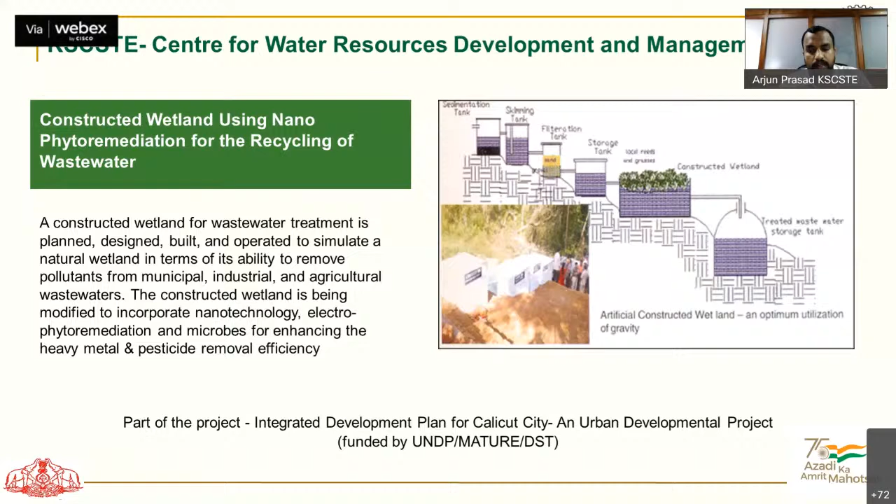Integrated Rural Technology Center is a granting institution of KSCSTE, involved in developing several innovative technologies, including crop residue biomass rapid composting, which is beneficial for farmers. They have established over 250 crop residue composting units in the district of Palakkad.

They have also developed a recirculatory aquaculture system with a moving bed biological reactor aquaponic system, a technology where water is recycled and reused after mechanical and biological filtration, used for high density culture of various species of fish utilizing minimum land area and water.

Another one is IRTC's microbial inoculum for solid waste management. It's a combination of safe bacteria, actinomycetes, and fungi with vibrant enzymatic activities, which has applications in the leather industry and elephant waste composting.

Now I would like to inform about some new initiatives of the Government of Kerala in the area of promising technologies, especially with future impact. In the present budget, many new projects have been proposed, which focus on steps to boost the knowledge economy and linking skill with manufacturing.

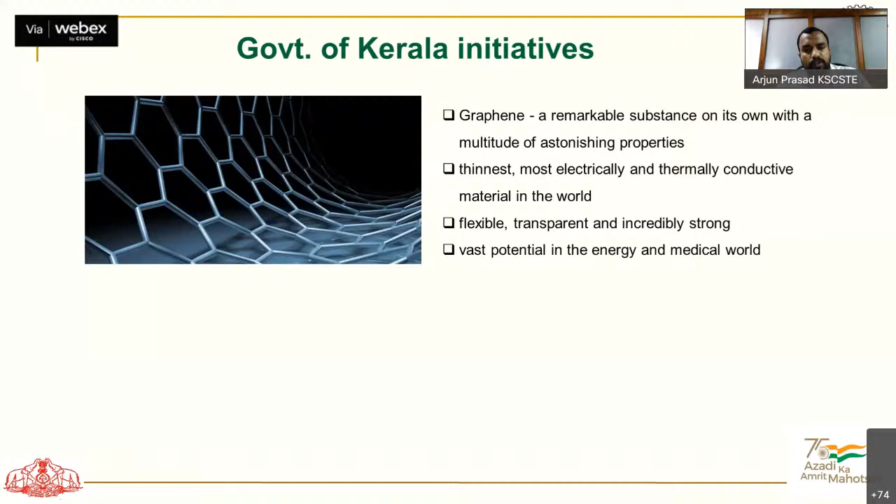Graphene is a remarkable substance on its own with a multitude of astonishing properties. It is the thinnest and most electrically and thermally conductive material in the world. Being very flexible, transparent, and incredibly strong, it has huge potential in the energy and medical fields.

Because of this huge potential, the Government of Kerala is in the process of establishing India's first Graphene Innovation Center, which is a joint venture of the Digital University of Kerala, the Center for Materials for Electronics Technology, Thrissur, and Tata Steel Limited. As we have seen, the Government of Kerala has numerous initiatives and programs to promote R&D and human resource development in the area of future technologies.

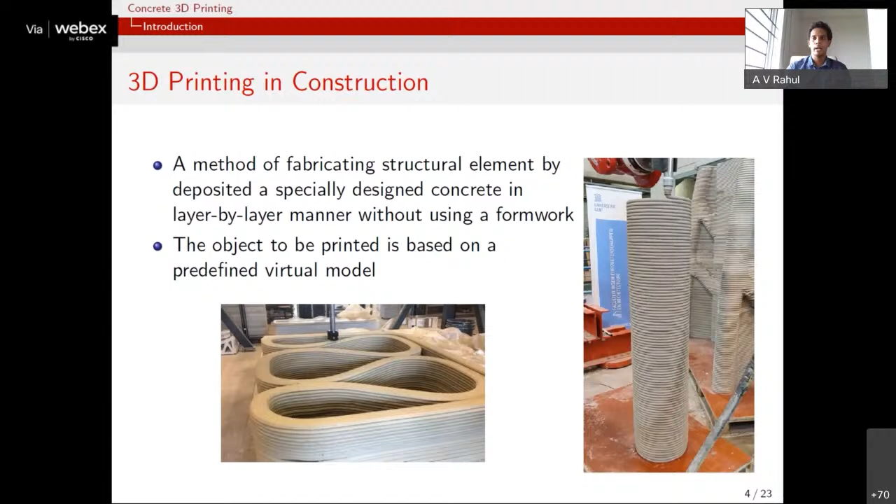So making complex elements, and also the elimination of resources and rapid construction, becomes the key attraction with concrete 3D printing. Now, right from the point where this technology started being adopted, many countries around the world showed interest in this technology.

The first proposition of this idea happened around 1996, 1997. But a real push for this technology started around 2012, where it was demonstrated at a laboratory scale that concrete mixtures can in fact be designed for this kind of technology, for layer-wise deposition.

Once this was demonstrated at a laboratory scale, a lot of people around the globe got involved - a lot of groups in Europe, a lot of groups in the US, and even in Asia, China, Singapore, India has also been involved in a few projects where they're trying to implement this technology. So a lot of countries around the world have shown keen interest, and it's not just the research groups.

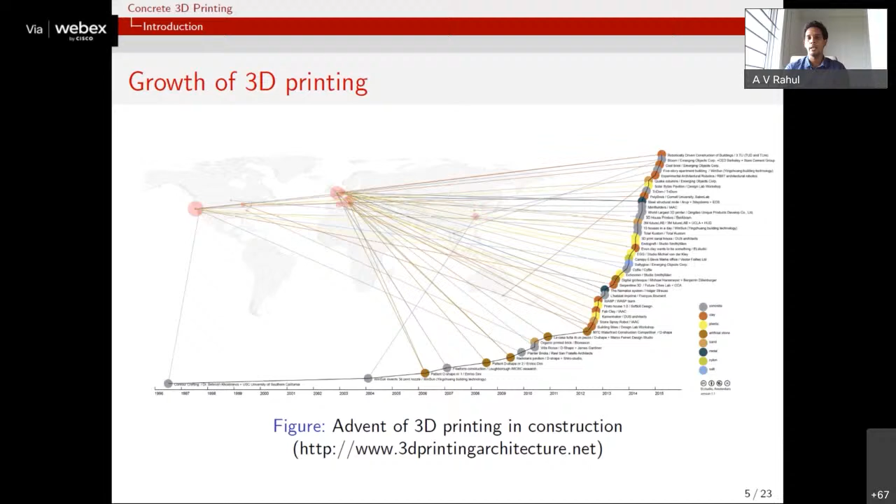Even if you look from the industry side, in Europe for example, there are many startup companies focusing on this technology, trying to provide services specific to concrete 3D printing, specializing in this area now. So both industry and academia have shown keen interest in taking up this technology, from the time it was first introduced. So some major projects have happened around the world which have utilized this technology.

On the top left, you see a barrack building that's made by the US Army. Now, the interest of the US Army is another aspect concerning 3D printing, where you can do construction in inaccessible areas. Their idea is they transport the 3D printer there, and then they can set up a barrack building very quickly in areas where they can't really transport labor and other resources to the construction site. So construction in inaccessible areas is one of the focuses which the US Army is particularly taking this up for. Even the Indian Army has some projects where they're trying to make barrack buildings through concrete 3D printing technology.

The second one that you see on the right side is called the Milestone Project, which involves construction of 5 residential houses. The idea of constructing these houses is to bring out the shape freedom that you get with 3D printing. You can see these beautiful curves designed by the architects who made this building. That's possible again because of the fact that you don't need formwork, and these complex shapes can be realized through niche technology like 3D printing.

The third one that you see is set up in Italy, the project that was showcased in the Venice Biennale. It's a multi-leg pedestrian bridge actually, which was 3D printed. Different elements were 3D printed, and then they were assembled together. The design was such that altogether the members act in pure compression, so then you eliminate the need to have reinforcement in the structure.

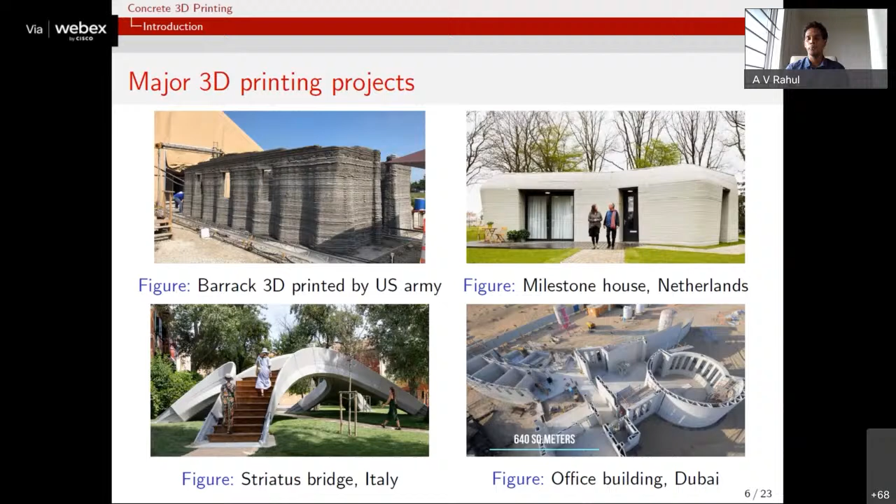Again, these arches and these unique shapes can be quite easily fabricated by concrete 3D printing technology. To do this through conventional methods, to make thin elements and curved elements, would have been quite challenging. Then the one you see at the bottom is a project that's happened in Dubai, an office building which is right now one of the largest buildings that has been 3D printed. It's about 640 square meters. This is an office building that's made in Dubai.

So with printing, we'll talk about more technical aspects related to the mixture proportion and from a civil engineering perspective. One key aspect is how do you design the mixture for concrete 3D printing.

Now, if it's even any type of 3D printing that you talk about, not just concrete, even polymer 3D printing, what you need to really look at is a transition from a liquid-like to a solid-like behavior. So initially, to pump the concrete to the point where it has to be deposited, you make a concrete and put it in a pump, then it has to be deposited through a nozzle to the print head. So till that point, you want the concrete to remain a more liquid-like material. But once it's deposited out from the nozzle, the concrete should undergo a transition to a solid-like behavior.

In polymer printing, they do this transition based on temperature. Once the polymer comes out, it's quickly cooled. Inside the pump and the regions where it's being transported, it's heated above its melting point, so it's like a liquid. Once it's exited from the nozzle, there's a sudden transition in temperature which causes it to transform quickly to a solid. In concrete, we work in a different way, which I'll talk about in the coming slides.

So two aspects that you need: one, the ability of concrete to be pumped up to the nozzle, which we call extrudability in 3D printing terminology. And once it's deposited from the nozzle, it has to be able to retain its shape, or have a solid-like behavior, which we call buildability. These are two essential requirements that you need to characterize to design mixtures for concrete 3D printing.

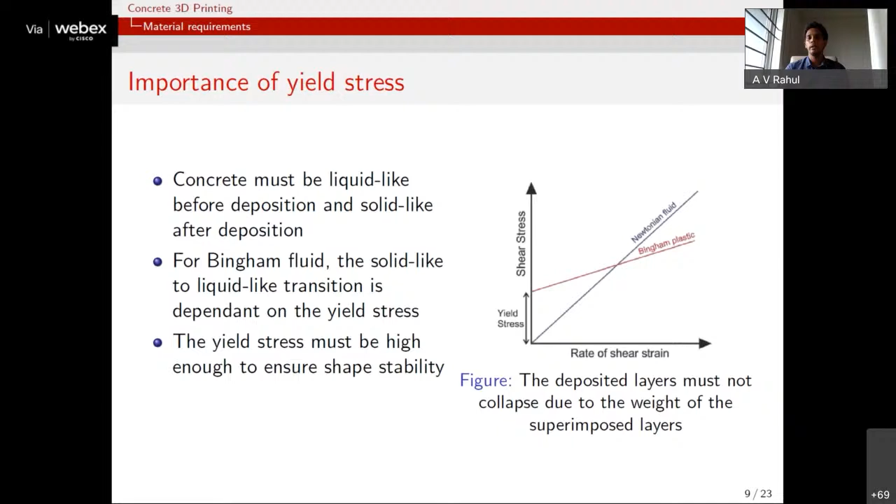This high yield stress ensures that even once the material is pushed out from the nozzle, once there's less stress on the material, flow is prevented and it's able to retain its shape. But during pumping, we use a specially designed pump to go above its yield stress and initiate flow in the fluid. Once it's deposited out from the nozzle, the high yield stress ensures the concrete can retain its shape.

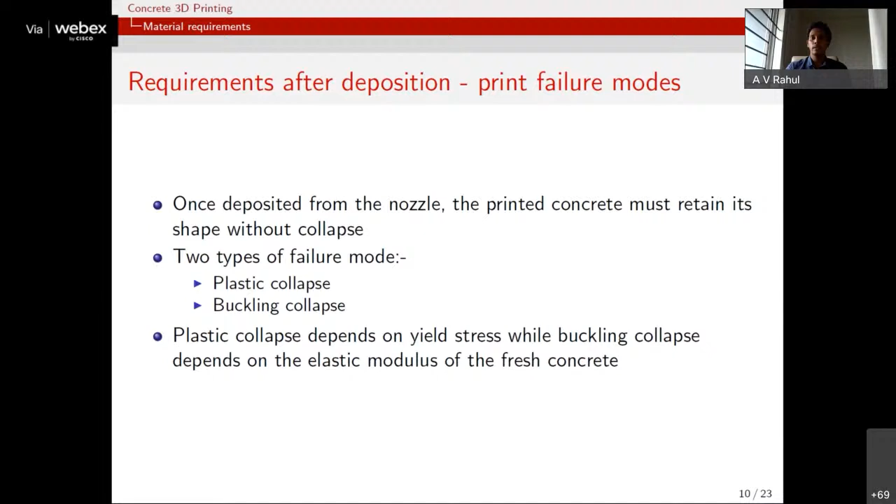The bottom layer starts to flow, and there's plastic collapse occurring in the material. Buckling type of collapse occurs in the case of thin elements. If you have very thin elements, they can undergo lateral deformations due to buckling, and then the element can undergo a buckling failure. Now, if you look at the buckling equations derived for hardened concrete, the same would apply here.

There, the material parameter that influences resistance to buckling is the elastic modulus. So the material should have a sufficiently high elastic modulus once it's deposited to prevent buckling type failure, especially if you're designing or looking at very thin elements.

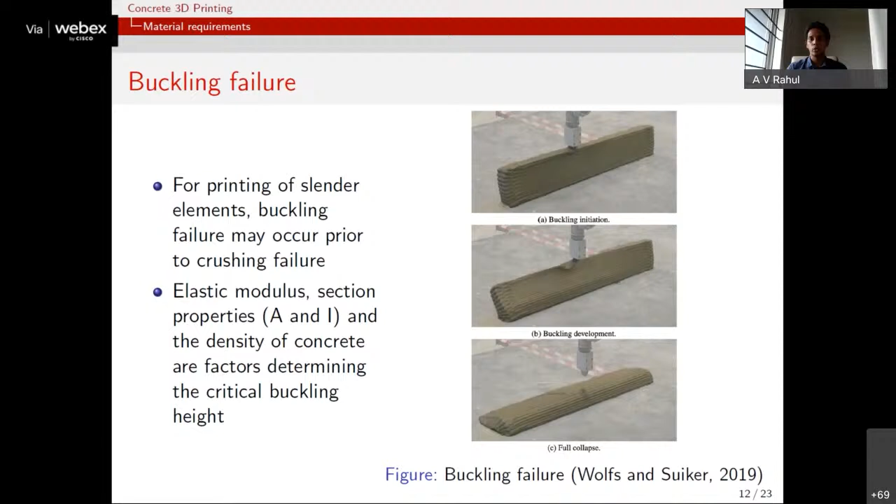Buckling failure will also depend on the section properties or the moment of inertia. For example, a printed element with high moment of inertia provides higher resistance to buckling failure. Also, the cross-sectional area and sectional properties will influence it, and also the density of concrete, which will also influence resistance to buckling failure.

Having understood that elastic modulus and compressive strength both influence plastic and elastic type failure, plastic and buckling type failure in fresh concrete, how do you characterize these properties? In hardened concrete there are standardized methods to do this, but how do you characterize this for fresh concrete? This is an experiment that shows how to do this.

The reason is that there's a high yield stress for this early age concrete, for 3D printable concrete, it's more stiff than conventional concrete. Even when you demold it, it can still retain its shape. Then we do this test with a very sensitive load cell, a very low load cell used to carry out this test. And we capture deformation using a video extensometer system.

Initially you see an elastic behavior and then a plastic type deformation after that. So it's mostly an elastoplastic material early on, but as you proceed to higher ages, as you go to 420 minutes for example, you see more of a strain softening type behavior, which is most closely associated with that of hardened concrete.

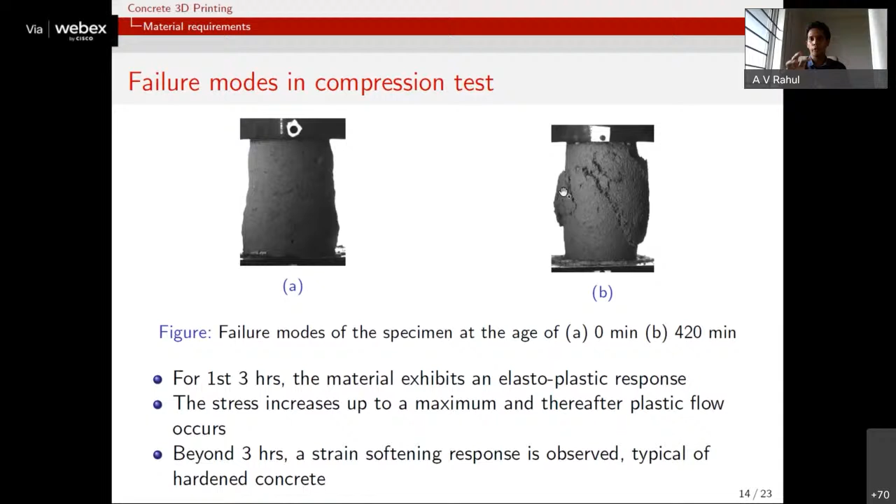So both of these parameters can then be utilized in models to look at whether the print element you're going to make is actually going to fail by plastic collapse, or at what height it's going to fail by plastic collapse, or what height it's going to undergo a buckling collapse. These calculations can be run to ensure that you don't undergo a print failure when you actually carry out the printing process.

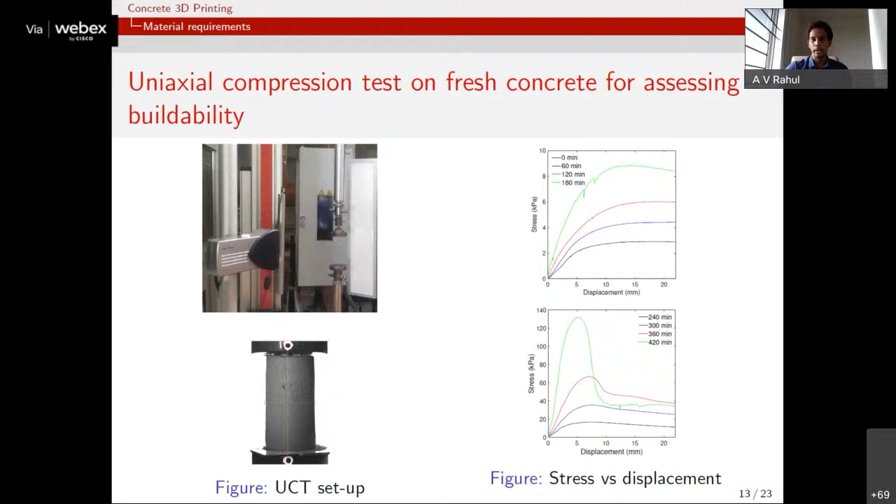Just to give you some brief info about the mixture design. There are no standardized codes or procedures, but you can definitely look at approaches like particle packing to design 3D printable mixtures. In 3D printable concretes, when you choose certain ingredients to include in the mix design, you always have to think about how it will influence the flow behavior or rheology of the system.

For example, if you add additives like microsilica and nano clay, they're likely to decrease your setting time. So you will see a much more rapid evolution of compressive strength and elastic modulus. When your mixes incorporate nanoclay or microsilica, you can carry out printing much faster, because the evolution of the material parameters occurs much faster.

Also, during pumping, you can sometimes encounter issues like phase separation, which you can avoid by using admixtures like methyl cellulose. Robustness is another key aspect you need to consider in mix design.

One problem with 3D printable concrete is that the range over which it actually works is very narrow, especially if you have a batch change in one of the materials. For example, if you're using a particular type of fly ash and the batch changes, you might see a change in the workability of the concrete. That workability change may be just sufficient to cause the mixture not to print properly. So that robustness range you have with these kinds of mixes is very narrow.

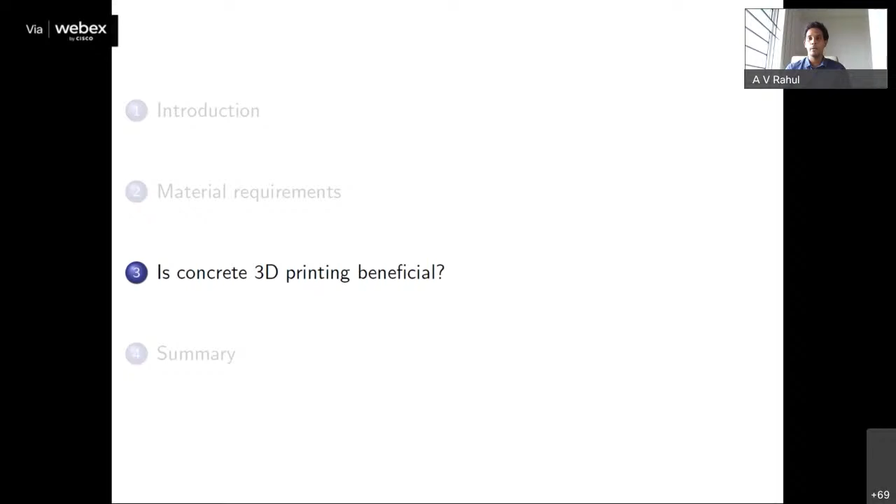Now, to address the question of where you use this technology: what type of structures can you actually make with 3D printing technology? We looked at some of this earlier, where we saw major projects happening around the world. But to generalize, one aspect where you have to look at 3D printing is when you particularly need to do a complex structure. Now, why do you need a complex structure? What advantage do you get from it?

...the conventional construction becomes significantly more expensive, because you have to have formwork for this type of structure, and the formwork cost significantly adds to the total construction cost. But with digital fabrication or 3D printed structures, you don't see that significant increase even as complexity increases. So there's a break-even point, above which conventional concrete is significantly more expensive than concrete made through digital fabrication.

Right now the cost is quite high, but there's a lot of research happening around the world, including in India, where we're trying to bring down this cost by looking at less costly and more viable additives in designing 3D printable concrete. Through further research, this break-even point can be shifted further downward, so that 3D printing becomes more economical even in relatively less complex structures.

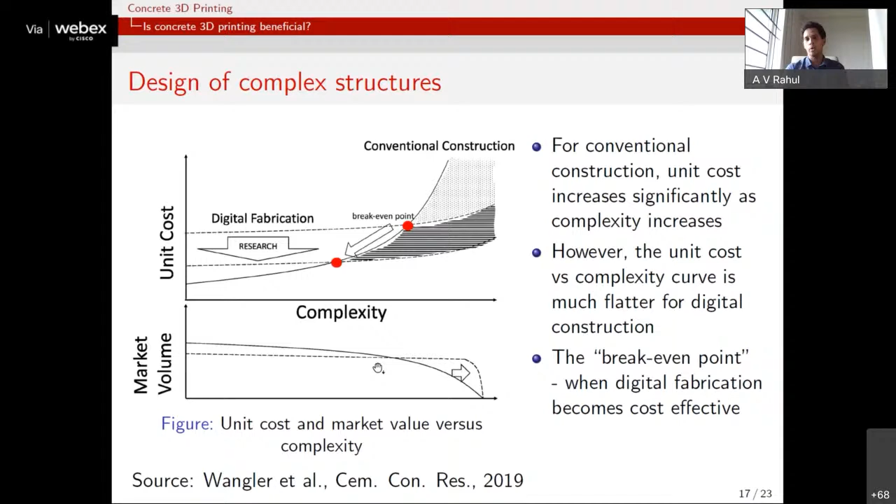So another aspect we need to talk about is why do we need to do complex structures. One aspect with complex structures is that you can actually do shape optimization, and through shape optimization, an overall reduction in material volume can be achieved to meet the same structural performance.

But to really make this complex type of structure is very difficult in real life scenarios because of the formwork involved. With 3D printing, this can be done quite easily, and by introducing that complexity, significant material volume reduction can be achieved. That then brings in the sustainability element in 3D printing.

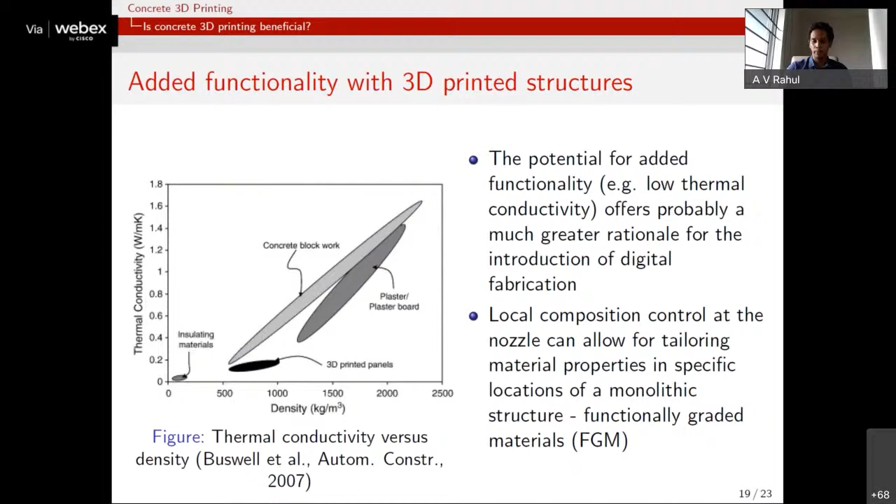Before we wind up this presentation, I'll also give a few aspects regarding a project I worked on. This project is called the 3D2B Green project, carried out at Ghent University in Belgium.

This project is to construct breakwater units using 3D printing technology, in collaboration with some industries, one of the major construction companies in Belgium, and two other companies, ResourceFull and Witteveen+Bos, who are also involved. The aim of this project was to use 3D printing technology for breakwater units and deploy them in Belgium as well as Dubai ports.

Utilizing this technology can bring quite a lot of economic benefits, such as reduced formwork costs, because these complex elements have to be cast in specially made formworks. Given that you need several numbers of these breakwater units, having so many formworks, or waiting for one form to release its concrete before casting the next, introduces significant delay in construction, leading to an overall cost increase. If you can do 3D printing, an in-situ 3D printing robot can be brought to the construction site and print very close to where it has to be deployed.

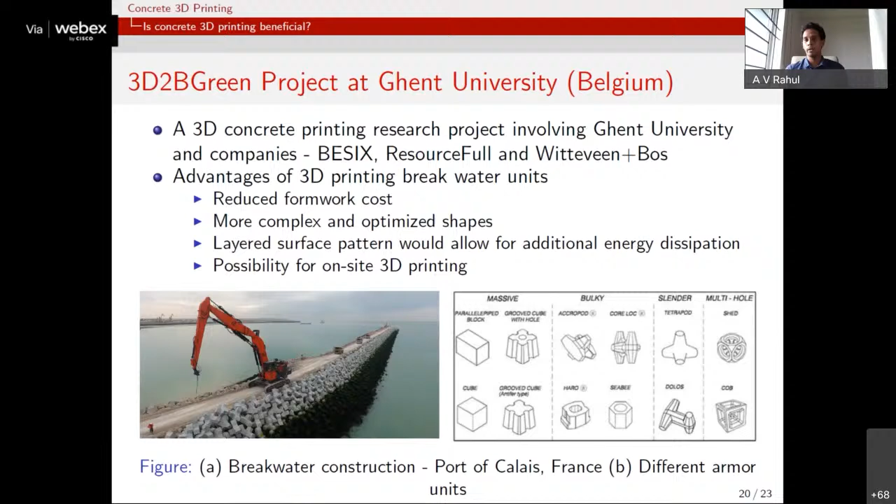Preliminary studies we did at the lab also indicated that the layered structure 3D printing has may provide additional energy dissipation, therefore providing better hydraulic performance when compared to mold cast with 3D printing, and also the possibility for on-site 3D printing, bringing down the transportation cost.

One more aspect I'd like to talk about is a set-on-demand type approach. This is a patented approach developed at the same university. Here we try to introduce an accelerator at the nozzle to increase the buildability of concrete.

In 3D printing, there are several conflicting requirements. One is between extrusion and buildability. For good extrusion, for the concrete to be easily pumped up to the nozzle, it has to be as flowable as possible. But once it has exited the nozzle, it should have very low workability. It should stiffen quickly so you can build more layers on top. So the material requirements before and after extrusion conflict with each other.

Because of this, we are often restricted: if you make it very stiff, you will end up with pumping issues. If you make it too flowable, you will end up with issues on buildability. So most of the time in 3D printing, you are restricted by the height you can reach.

On the right hand side, we worked on a technique called set-on-demand, where an accelerator is introduced just at the nozzle, which significantly alters the stiffening rate of the concrete. The introduction of this accelerator causes it to undergo a flash set, and this allows us to make much larger structures.

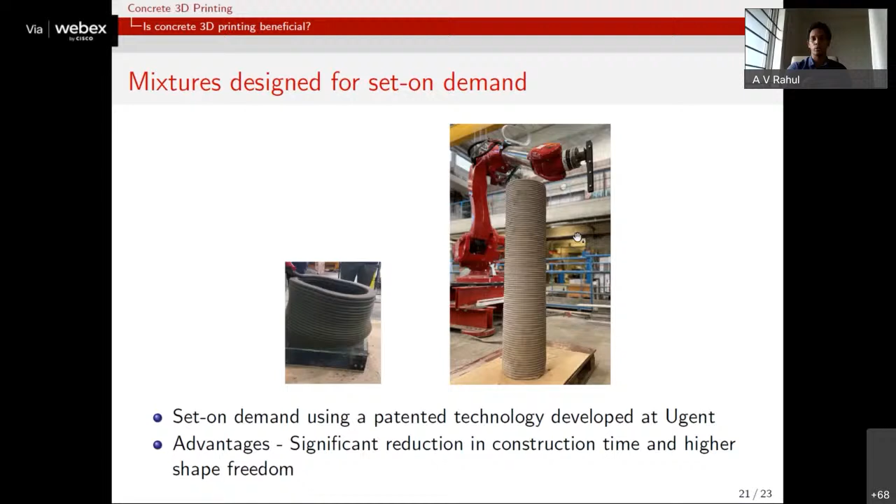This column is about 1.5 meters and shows no signs of failure until now. It was made at a very rapid construction speed - in fact it was printed 4 times faster compared to the first element. So the higher rate and higher height you can achieve with this technology is one advantage of the set-on-demand type approach.

To summarize what we looked at in this presentation: we discussed why 3D printing is a promising technology for construction. There are certain niche areas where 3D printing can be significantly more economical compared to conventional construction. Then we talked about the technical aspects, the challenges in designing 3D printable concrete, but these challenges can be surpassed if you understand the science of what aspects to look at - before deposition and after deposition - and what type of test methods you can design to help develop 3D printable concrete mixtures.

3D printing becomes economical primarily in making complex structures, and also in areas where elimination of formwork contributes significantly to construction cost. Finally, we talked about an ongoing project called 3D2BGreen, being done at Ghent University, which works on developing sustainable 3D printable mixes for construction of breakwater units. With this, I wind up the presentation.

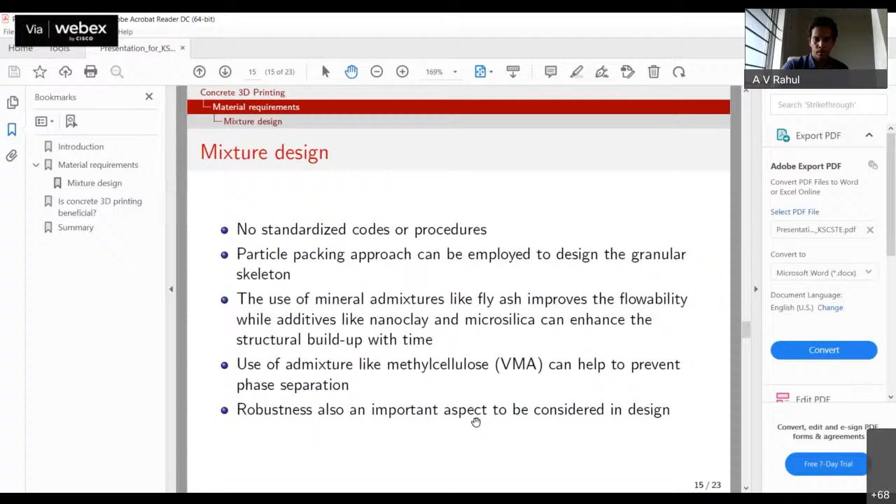The other approach is to do it in one go. That type of approach was done in the office building in Dubai, where the height is about 9.5 meters. A very large robot was used, from a company called Apis Cor, a very large 3D printing robot. It was brought to the site and done in 2 print sessions, one where it reached half the height and waited for the concrete to harden, then the remaining part of the structure was made. So the scalability issue is dealt with in 2 ways: one, making small elements and assembling them; the other, using a larger concrete 3D printer to do it in one go.

Okay, that is fine. But my specific doubt is, once you join pieces, what about the force dynamics? How is that taken care of in this case?

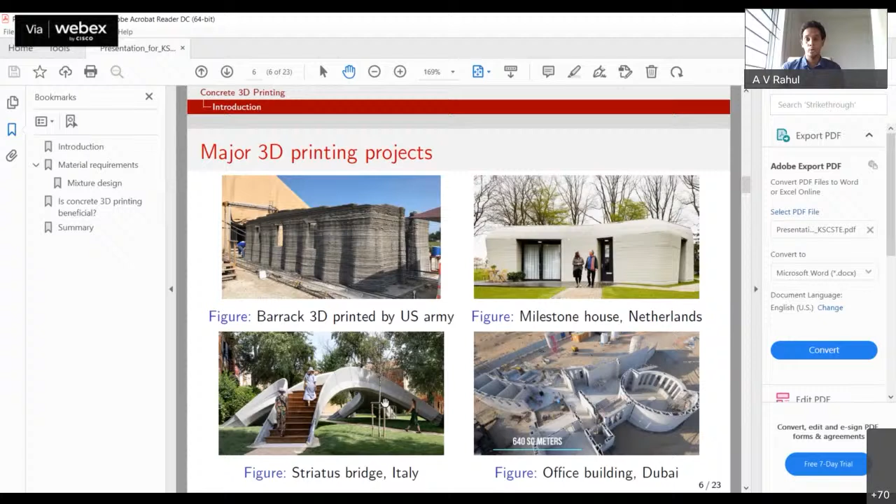So this aspect, how you do the connections, is an important element. When we design the structure itself, we have to keep that in mind. In this case, because when you assemble everything it was in pure compression, you don't need bed connections in the structure, it just had to be put in place. But on the other hand, if there are tensile members, there'll be stretching at the joints, and then you need some joining at the connection itself. That's how it was taken care of here.

Another approach - if you come back to this bridge here - the connection itself was ensured through grout connections between the different elements, but also by the fact that this is a pre-stressed element. A pre-stressed strand is put in place, and that pre-stressing force ensures it's held compactly together. So that's an important element, how to design the connection.

In terms of compression elements, you can stack them and join them using a grout or some mixture designed as a joining material. Or, in the design stage itself, you accommodate for this - when you have pure compression, you don't need bed connections, you can provide them but it's not really essential. Or when doing beam elements, you can do pre-tensioning. In this way, the connection is ensured.

Yeah, fine. But what about the reliability aspects? Because when more pieces are joined together, reliability also compounds - R1 times R2 times R3, it goes like that, no? Yes, that element is still there. So in that regard, we have to look at more studies, in terms of statistical and reliability analysis.

Okay, thank you, Professor. Thank you. Thank you, sir.

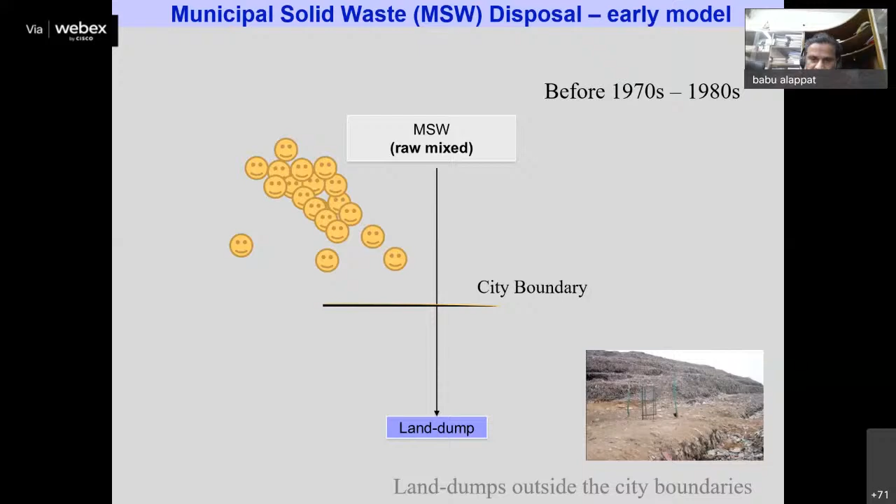By the 1980s and 1990s, the cities grew like anything, and the land dumps are actually now within the city. This is true for all the cities, the Dhapa dumping ground of Calcutta, the Okhla and Ghazipur, Bhalswa dumping grounds of New Delhi, even the Deonar dumping ground of Bombay. So then the problem starts because many people start living very close to the land dumps. As you can guess, there will be leachate pollution problems, particulate issues, and landfill gas issues.

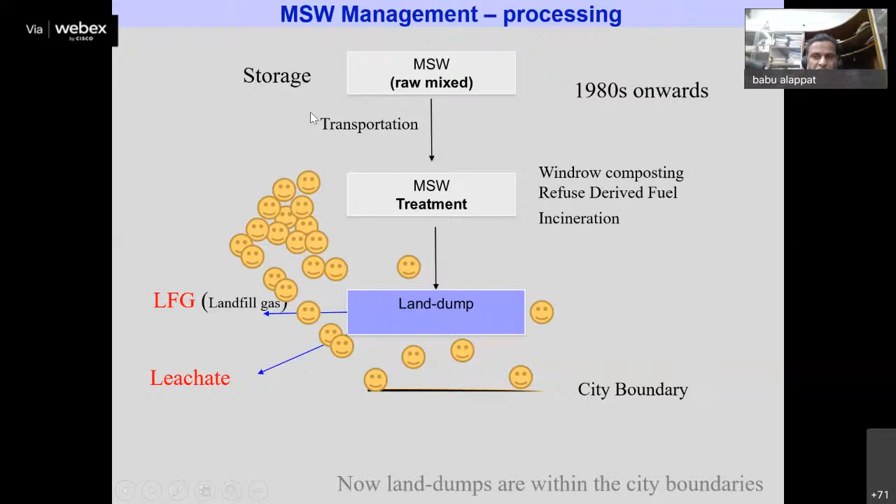So the government understood that there should be some intervention. Before the MSW is dumped, there should be some intervention like MSW treatment - windrow composting facilities, refuse derived fuel making facilities, even some incineration facilities all came up addressing this fact. The idea is to minimize the waste going to the land dump and also reduce the biodegradability, or to use this waste and recover something. So you can see we start with storage of municipal solid waste, transportation, treatment, and final dumping or landfilling. You can see advancements have been happening across all these domains.

For example, about storage, do you know very interesting containers started coming recently? It has all facilities - when you go nearby, it opens on its own and it will compact on its own. It will tell you what you have put and give you some points, maybe you can encash it in Big Bazaar or elsewhere, I don't know. So these are ATM kind of waste banking things - smart containers which are likely to come up in future. A lot of research has been happening in this direction, but I have not come across a smart container with all these features, so I am not showing any pictures.

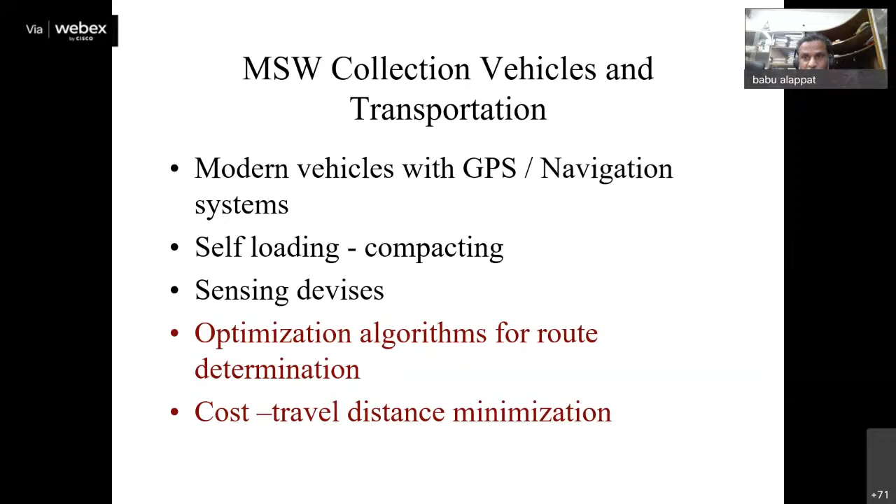In 2000, the first rule book on municipal solid waste management came. Interestingly, as per the rule, waste has to be processed before landfilling, and no more land dumping, only engineered landfills. But as you can guess, no engineered landfills came up in the country for MSW. Even now we have only very few engineered landfills, called sanitary landfills or SLF for municipal solid waste. There are a few for hazardous waste too, called secure landfills. The interesting part is the technologies started competing with each other because they are all dealing with the same raw mixed MSW.

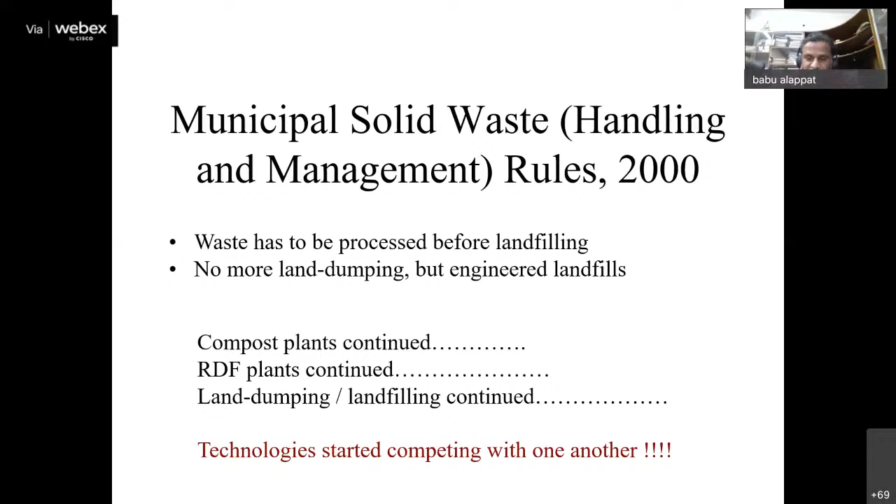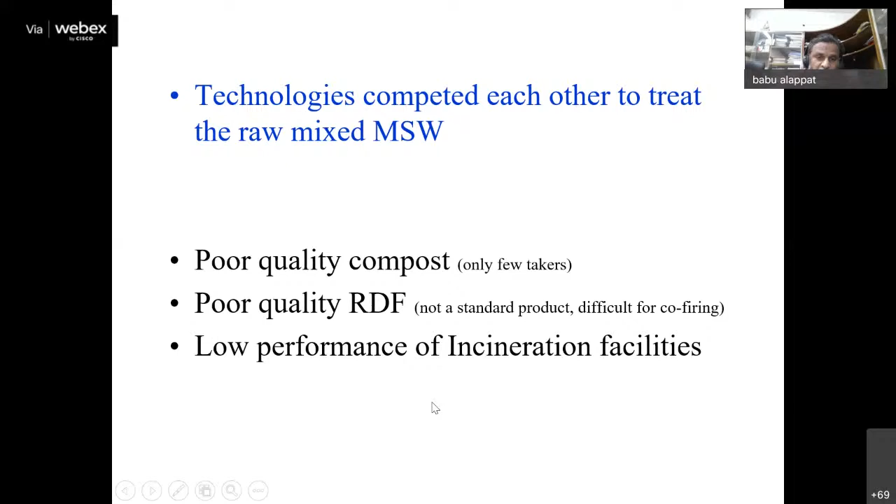People started comparing composting and incineration, asking whether incineration is better or composting is better. Actually, it is like comparing jackfruit and apple—both are fruits, but quite different, isn't it? So the technologies started competing with each other, and people started comparing all these technologies. The outcome was poor quality compost, very low quality RDF (refuse derived fuel), and relatively lower performance of the waste-to-energy facilities.

Then came the rules of 2016, which emphasized the need to segregate waste right at the source. We recommend the green container for biodegradable waste, the blue or white container for dry recyclable waste, and hazardous waste goes to the black container. It's very clearly written that biodegradable components of MSW should not be burned—it should go for bioprocessing: composting, vermicomposting, or biomethanation, anything but burning. This is a big difference in the philosophical approach to dealing with MSW.

The dry waste, containing different components, will go for sorting and separation. The combustible part can go for incineration, RDF making, or other thermal techniques like gasification or plasma pyrolytic technique, etc. Surprisingly and interestingly, for the first time there is a mention of how to deal with used sanitary pads and napkins. Everyone knows it's a very burning issue, right from Trivandrum to Jammu and Kashmir, but we never used to address that. In 2016, at least something was told about it.

Now, because of this intervention, the technologies have become complementary. This is the philosophical difference I want to highlight: technologies like composting and thermal techniques have become like brothers and sisters, complementary to each other. This is a major deviation.

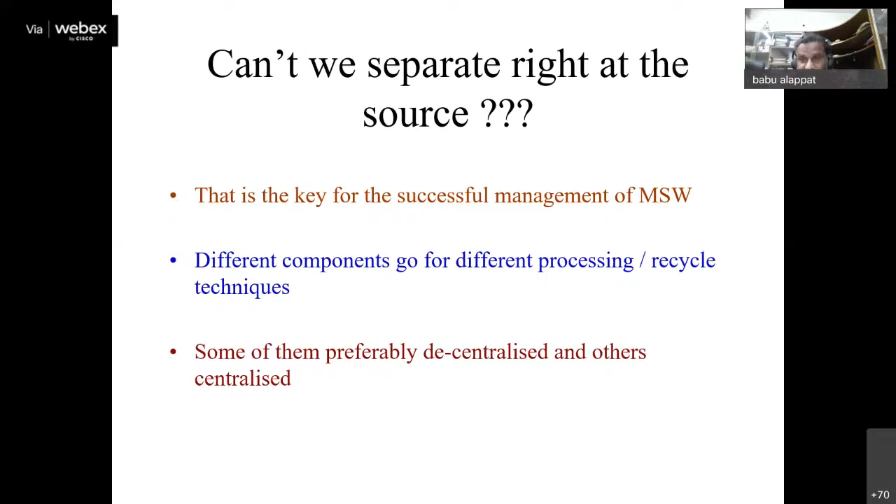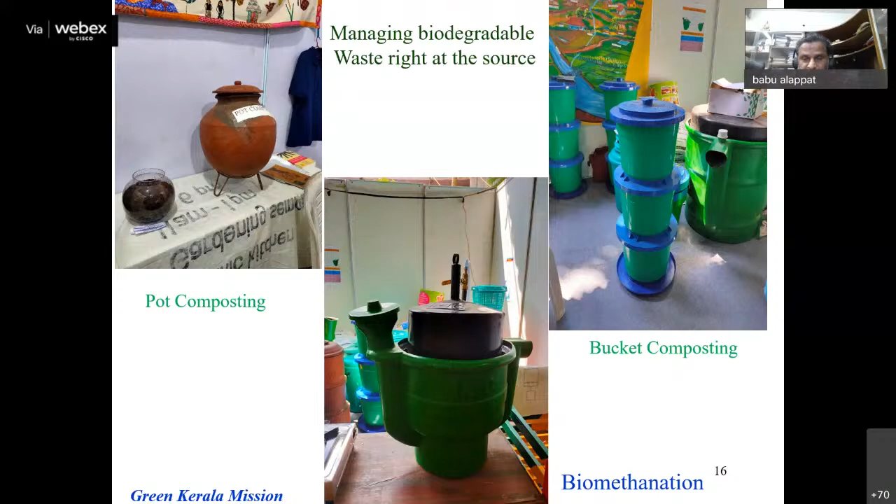The question is, can't we separate right at the source? It may not happen in big cities, but in cities like Indore, Surat, Vijayawada, and states like our own Kerala, there is a lot of emphasis on segregation right at the source. You must have seen pot composting, bucket composting, and pipe composting facilities—these are all intended to deal with the biodegradable portion of MSW right at the source. I know there are some issues with these facilities, but if you know the theory behind it, you can make it operational. Please understand, this is not rocket science or missile technology—it is very simple common sense, knowing the fundamentals of the technology we are using.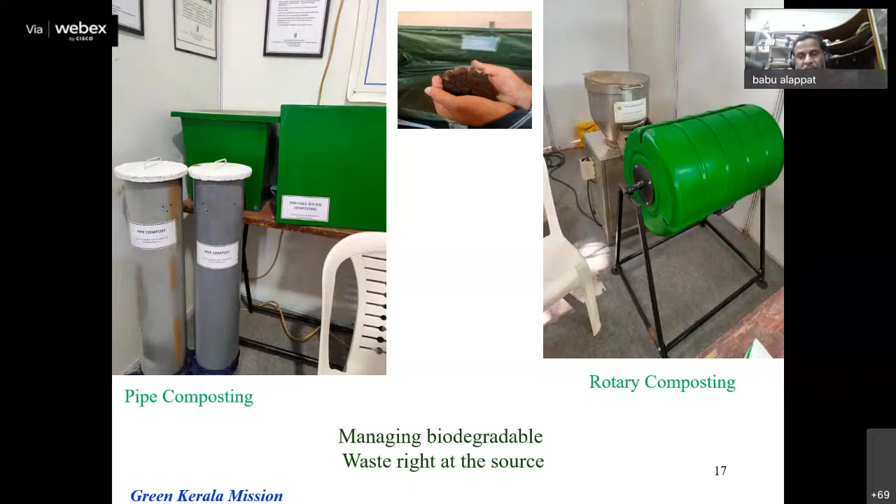The issue is, from waste to good quality compost takes a long time—that is the key. I'm very glad to see that some projects are running in Kerala on accelerating the speed of composting.

I listened to Dr. Arjun Prasad in the beginning, and it's very nice to see that in Kerala we are addressing this issue. The idea is to bring down the time requirement for composting through different pre-treatment techniques, so the time requirement is coming down. But the problem with composting is you don't get good quality compost because we start with mixed waste.

Please understand, once waste is mixed, you cannot separate it completely. The most dangerous component to separate is our food waste. If food waste gets mixed up with the rest of the components, it will always be contaminated, and you cannot separate it using any technique currently available.

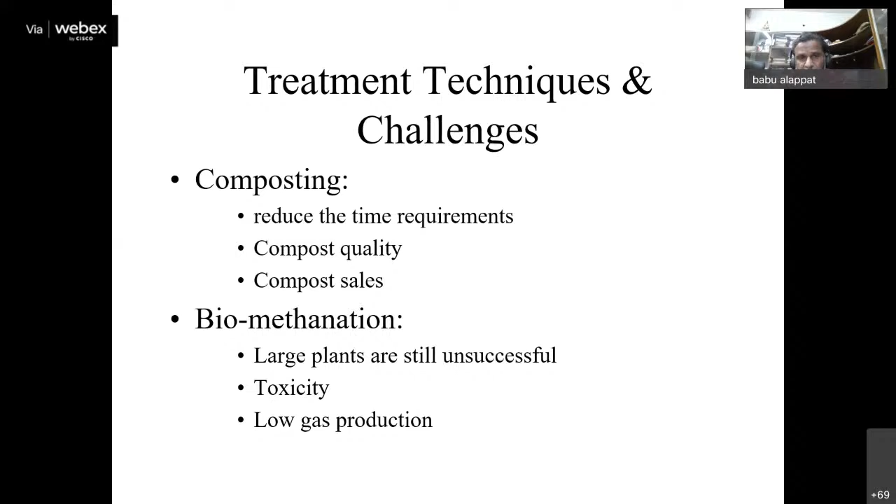That is the issue. Similarly, biomethanation is a technology that has been implemented. I know there are many biomethanation plants in Kerala, and some are working well, some are not. But please understand that small biomethanation plants can be made to work properly, not very large plants. There are some very large plants, like in Indore, at 150 tons per day, working now, but their performance is not up to the mark. A lot of research has to be done in that direction.

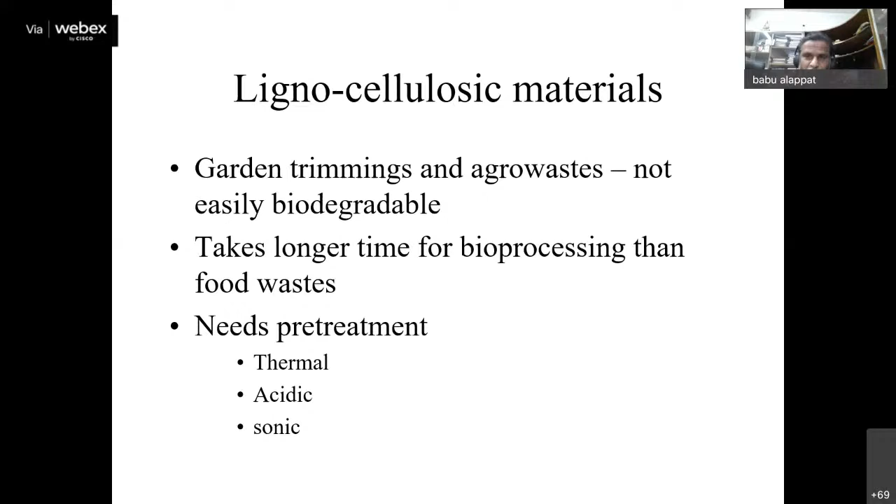Similarly, what to do with lignocellulosic material like garden trimmings, agro waste, etc.? I could hear that there was a project given in that direction in Kerala, that's very good. Lignocellulosic material can be mixed with kitchen waste, but the kinetics of biodegradation are very different, so normally these kinds of things need pre-treatment. As you know, in New Delhi in October and November we have severe pollution because of stubble burning, so a lot of work is going on in that direction too.

Then, as I told you, mixed waste is unfortunately a reality in most cities across the country, especially big cities. And how do we deal with that? The interesting part is the municipality now has to go for very complex facilities.

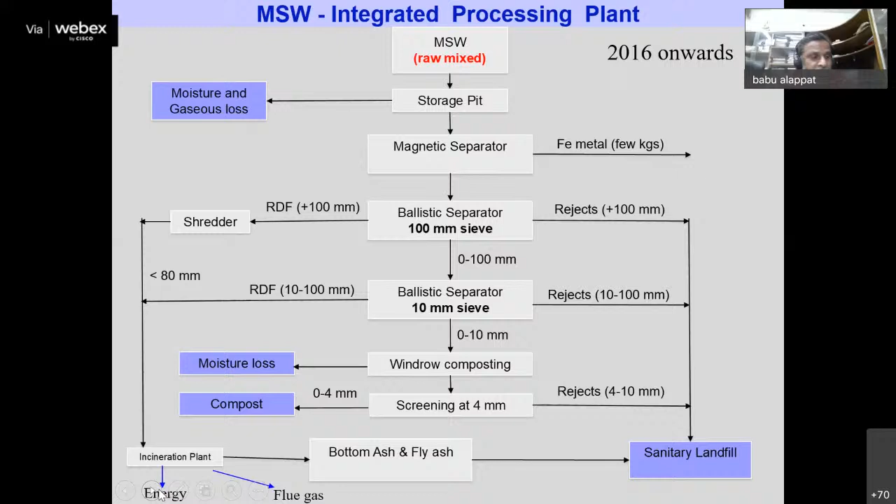This is the Okhla incineration plant, set up in 2016. It was actually set up to burn raw mixed MSW, but the moment rules were implemented, they could not burn biodegradable matter. So you can see there is an array of separation techniques like magnetic separators, eddy current separators, and screens. Finally, they do some composting and some incineration and get compost and energy. So that's what I told you - if we don't segregate at the source, the municipality will be forced to segregate at their plant, and incineration plants are becoming integrated waste management facilities.

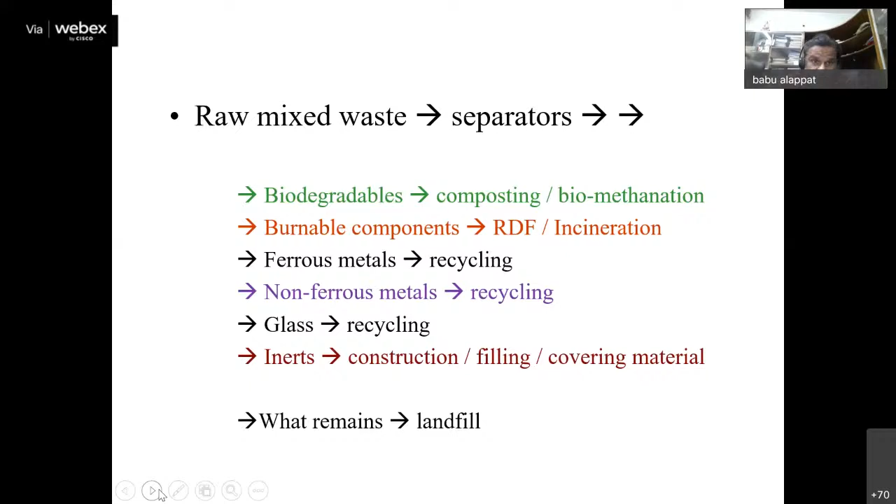Once we segregate the waste, everyone knows what to do. I know a good job is happening in Kerala, we all know what happens once the segregation is done, once it is separated. These days lots of emphasis is given on waste preparation. You cannot dump waste just like that, you cannot treat waste just like that, so waste treatment or pre-treatment is getting a lot of attention.

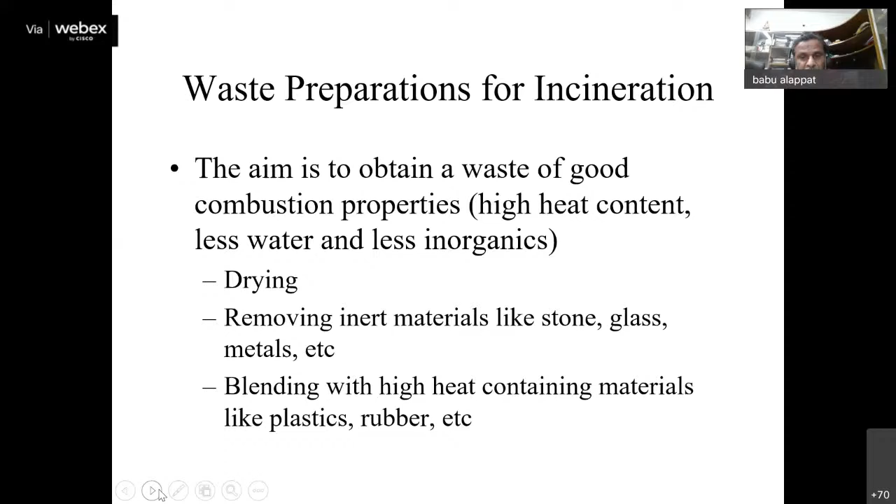This includes waste drying, removal of stone, glass and other inert components, and blending with high heat-containing material. Do you know about bio-drying, how to dry MSW? There is something called bio-drying, and some very good contribution has come from Cochin University in Kerala. In this kind of bio-drying, they use the first part of aerobic composting - thermophilic microorganisms release a lot of heat, and that heat is used to dry the MSW. So a lot of things are happening in pre-treatment, like drying, and also on the separation side.

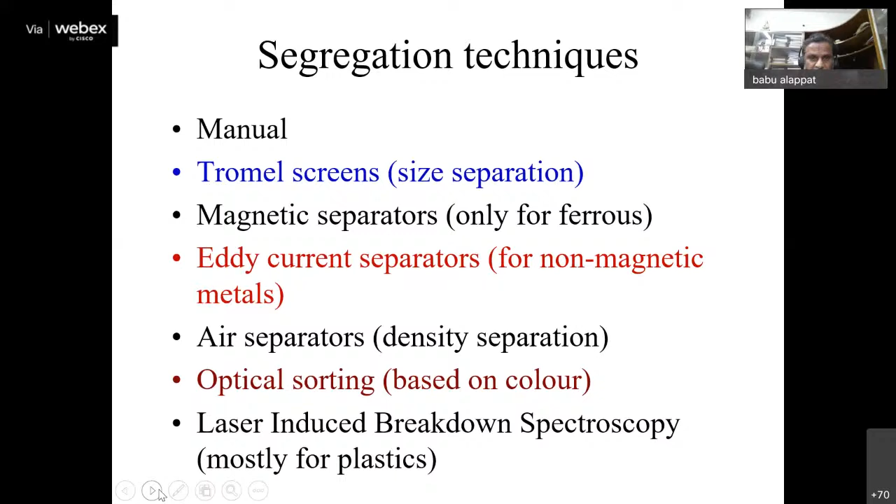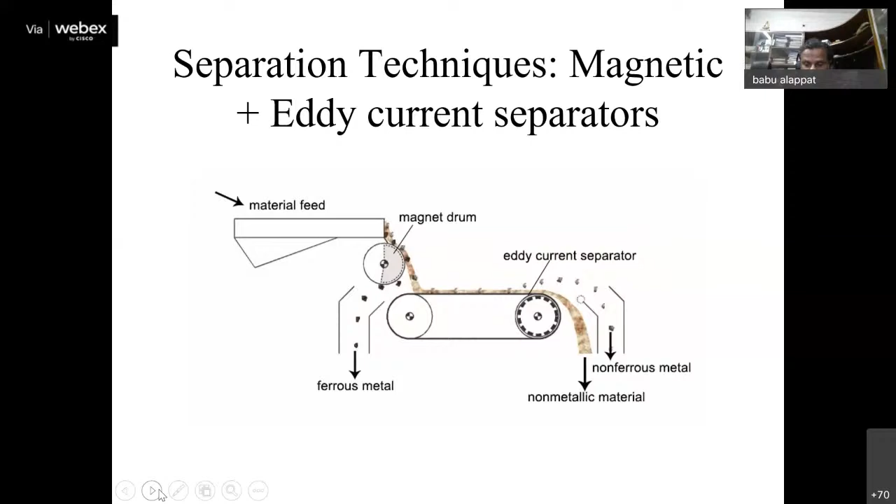There are many separation techniques because we don't separate at the source. Many cities are starting to fine people because they don't segregate, and I'm sure there will soon be fines implemented on people who don't separate waste properly. You can see there is an array of separation techniques nowadays used by municipalities, including magnetic separators and eddy current separators to separate non-ferrous metals, and sensor-based separation systems. Sensor-based sorting is receiving a lot of attention these days.

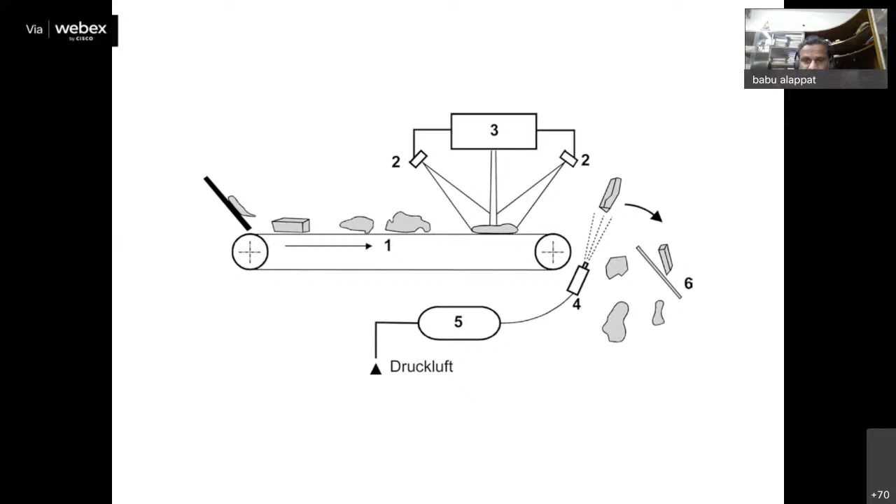We have three techniques: near infrared range sensors, visible light spectrum sensors, and LIBS using a laser. The NIR sorting facility uses these waves with a sensor, and the moment it senses something coming—normally used for separating paper, cardboard, and packaging—a steam jet or air jet pushes it to the side.

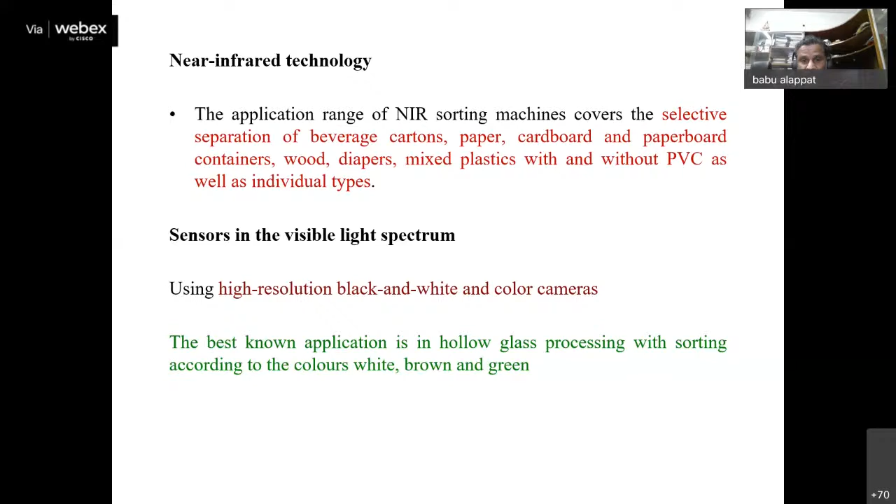Similarly, people are using visible light with a camera. These are all already implemented, but something is very interesting: visible light is normally used for separating different kinds of glass—clear glass, brown glass, green glass, like that.

Then another technique is LIBS, laser induced breakdown spectroscopy. Here a laser beam is injected onto the waste, and there will be some emission which is sensed. Any plastic like PVC or PU can be sensed and removed. This is something I want to

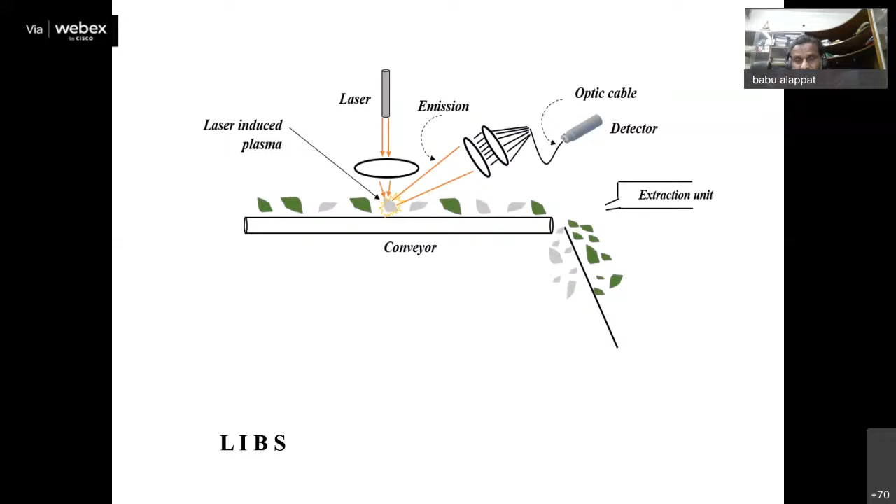highlight because when we teach, we say do not burn polychlorinated plastics like PVC—it will generate dioxin and furan. So don't burn PVC, but how do you separate PVC? There are techniques, but this is one that is yet to be implemented commercially on a big scale. I'm sure there is a lot of scope in removing PVC from the bulk of the MSW that

is burned. Then coming to the waste to energy scenario, nowadays from waste to grid power the conversion efficiency is very, very low—just 20 to 23% from waste to grid power electricity. A lot of research is happening in this direction to improve the conversion efficiency of waste to grid power.

Similarly, there are air pollutants like dioxin and furan which are actually very toxic, and the unfortunate thing is you cannot actually sense them. Nowadays most people use sensors for HCl, NOx, SOx, CO, CO2—all these gases and pollutants are sensed. But sensing will not work for dioxin and furan, which are very, very dangerous carcinogenic compounds. So we need to take a sample to the GCMS or whatever instrument is available. That is another challenge.

If you can eradicate dioxin and furan, or sense it, I'm sure you can become a millionaire, if not a billionaire. Similarly, bottom ash—in all developed nations their fly ash is dangerous.

But bottom ash they are using for different construction, like road construction, embankment, and whatnot. But in India we have seen that our bottom ash is not inert. I don't want to say it is hazardous, but we have to take it with a pinch of salt—we have to see whether it is inert or not. It's not inert. Fly ash is dangerous in most scenarios.

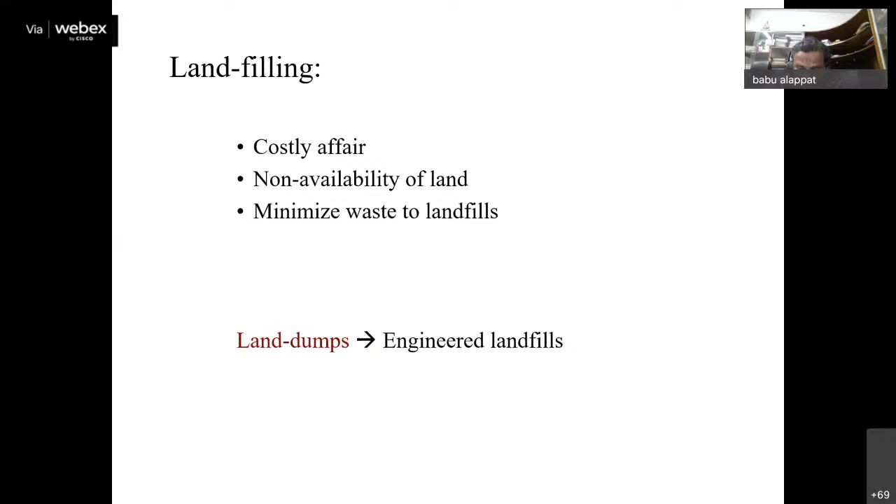Similarly, the last thing I want to tell you is about landfilling, the last entity of solid waste management. It's a very costly affair, and the whole treatment idea is to minimize the waste going to the landfill. As you know, we had only land dumps, and now we are actually moving towards engineered landfills.

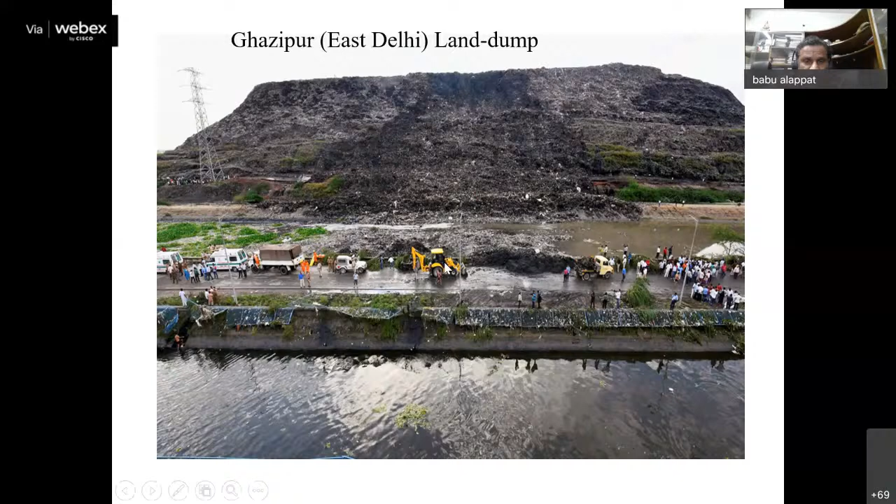So water is actually collected. The leachate is collected from the bottom, and the landfill gas is collected from the top. So this is called an engineered landfill. If it is meant for dumping municipal solid waste, it is called sanitary landfills.

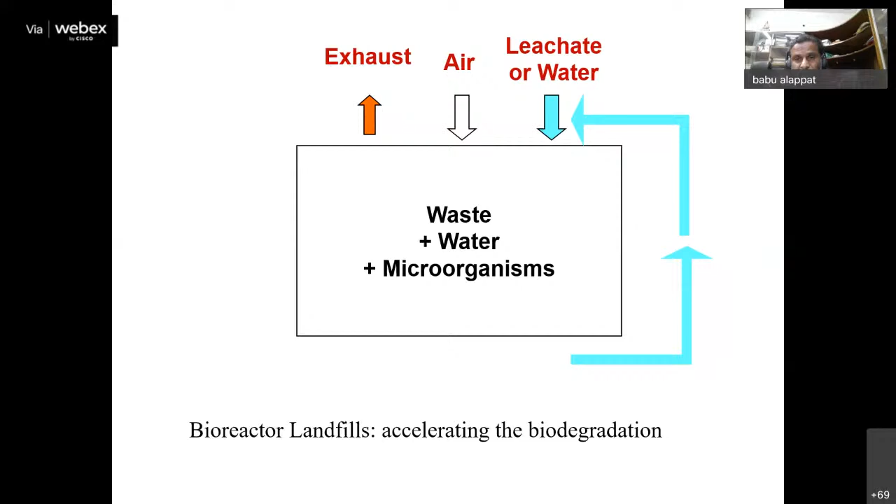And nowadays, people are going towards bioreactor landfill, where the entire landfill is viewed as a huge bioreactor. They collect the leachate from the bottom and recirculate it, so we can reuse this landfill area again and again after maybe 8 to 10 years. These are all upcoming areas of research and commercialization of the technology.

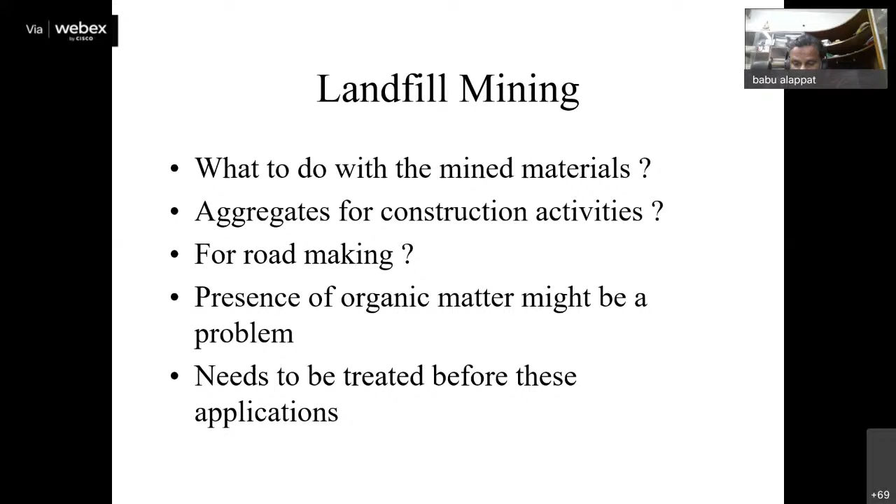And now everyone speaks about landfill mining. In New Delhi, we are also trying to mine those old mountains of MSW. But what to do with the mined material? It's a valid question. If there is plastic, you can take it for burning, but what about the inert material, which is huge in amount? Can you use it for road making? Can you use it for construction? It has a lot of organic matter present. That is the issue, so a lot of research is happening in that direction also.

Similarly, another issue is public acceptability. I'll wind up in another 1 or 2 minutes. Public acceptability is a very big issue because for any waste management facility, people have the NIMBY syndrome - not in my backyard syndrome - and the banana syndrome - build absolutely nothing anywhere near anything or anyone. People say I don't want a waste facility to come up in my backyard, but then it can be in your backyard - so what is the solution? The population density is going higher and higher.

There is only one way, in my opinion: involve people right from the beginning, right from the planning stage, and maintain transparency. So as the last point, which technology is going to sustain when we speak about MSW or waste management technology? Let me tell you, in my opinion, the technology that can be integrated with the urban utility services may be the one that may survive. It need not necessarily be the most eco-friendly one, nor necessarily the least priced one, but those technologies which can be integrated with the power grid, integrated with the construction industry, integrated with agriculture...

Indian urban scenario is a very, very complex scenario. Can you tell me how many urban systems are here? You can see power distribution, communication lines, residences, commercial establishments, and below the ground, water supply lines, wastewater sewerage lines, even solid waste collection facilities. So it's a must to integrate all these things, and that technology which can be integrated nicely, in my opinion, may be the one that may sustain.

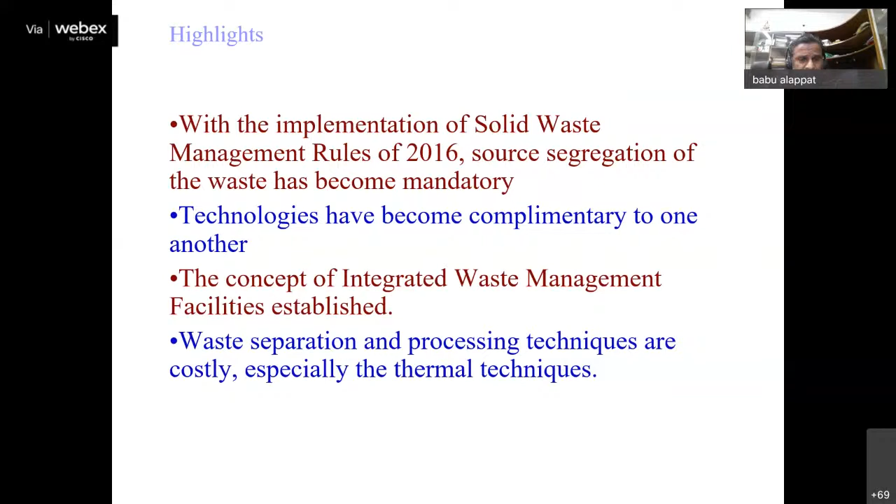So that's all from my side. I think now there are a lot of changes in municipal solid waste management. The technologies have become complementary to each other, and the concept of integrated waste management facility is already established. So that's all from my side. Once again, I thank you for inviting me for this lecture. I'm sorry that I could not complete it in 15 minutes - I tried my level best, but it spilled over. I'm sorry for this, so you can avoid questions so that the time is maintained up to some extent.

Thank you so much, sir, for that enlightening address. I think there are no questions. You have elaborated on the different approaches and technologies in solid waste management. Thank you so much.

Professor Alappat, yes? Yes, listen sir. What do you say? I have a couple of doubts. Yeah, you can go ahead. No problem.

Some years before, it was actually considered that the plasma arc gasification process was somewhat like an advanced system used in Japan and other countries, and I guess some plan came in Madras, Chennai also, but subsequently nothing is heard about that.

Sir, I want to tell you details about that, whether it is practically feasible, can it be considered as a future technology? Professor, number one, what I can tell you about thermoelectric generators - from incinerators, actually heat is getting wasted. So how can we usefully convert it into electricity? So these are two doubts I have.

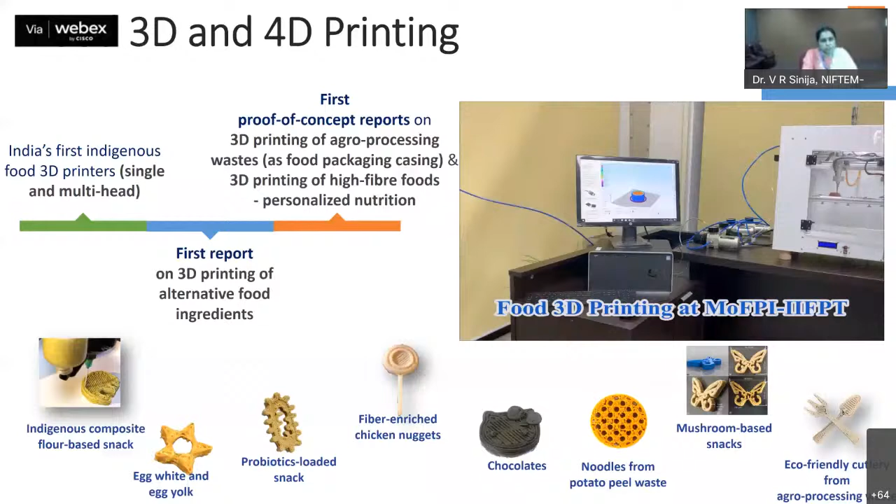Another area emerging with the vegan trend in consumers is plant-based milk as well as meat analogs. The market is also growing at a very fast rate for these meat analogs as well as milk analogs. Actually, 10 years back, Beyond Meat, one company, already made this plant-based meat in product form,

like a burger form, combined with KFC. They made it into reality, and it was well received by customers also. So those who don't want to go for animal meat can go for plant-based meat analogs. The advantage of plant-based meat is that it avoids carbon footprinting in the process, and a lot of sources are there by which we can go for plant-based meat analogs, like oil seeds, cereals, proteins, even legumes, pulses, and even our jackfruit is a good candidate for formulation of these plant-based meats.

Another area getting more attraction is entomophagy. Entomophagy is nothing but, in some countries like China, Thailand and others, they are eating insects for the required protein content. Insect eating, because of traditional approaches or culture, most people will show their reactions against this. But the fact is that nowadays a lot of research and products are also there in the market in which protein extracted from various insects is incorporated.

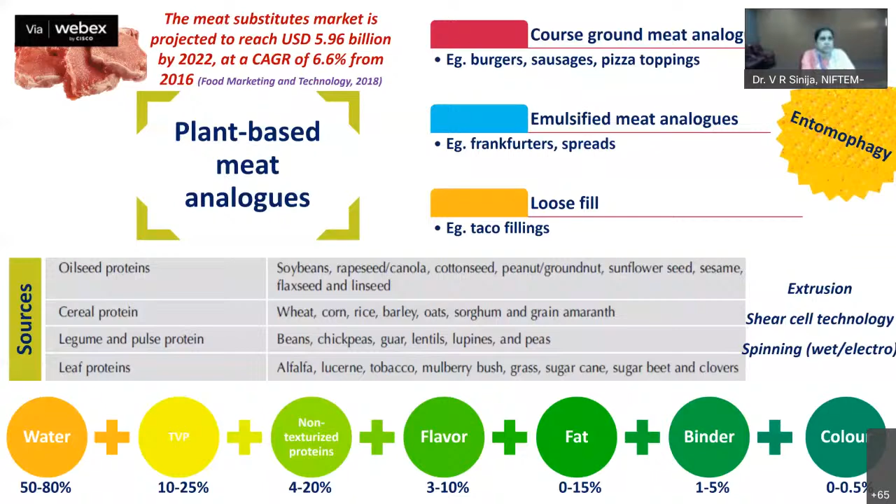This is a good source of protein, these insects, and the bioavailability of that protein is also very good. So this is one of the emerging areas, along with plant-based milk and meat analogs, which I already mentioned. Through 3D printing, we at NIFTEM Thanjavur have also produced a meat analog.

One thing we need to consider here is the taste as well as the texture. The texture matters a lot. So we have to have some binders and stabilizers which we need to add to this material to get the proper texture as well as taste, and also the price. Price is the major issue preventing the popularization of plant-based meat in our country.

Coming to plant-based milk, many people have lactose intolerance—lactose is the milk sugar present in cow's milk. Some people are allergic to this sugar, so they cannot consume milk-based products like ice creams or whatever. As an alternative, nowadays plant-based milk is getting popularized in the market—soya milk, coconut milk, even millet milk and other milks from pulses are getting popularized.

We have also developed some products based on these plant milks, like coconut milk. We have developed ice cream, and ice cream is a very fast moving consumer good, liked by everybody from a child to an old person. Everybody loves to have ice cream, so we can give a healthy ice cream through these plant milks.

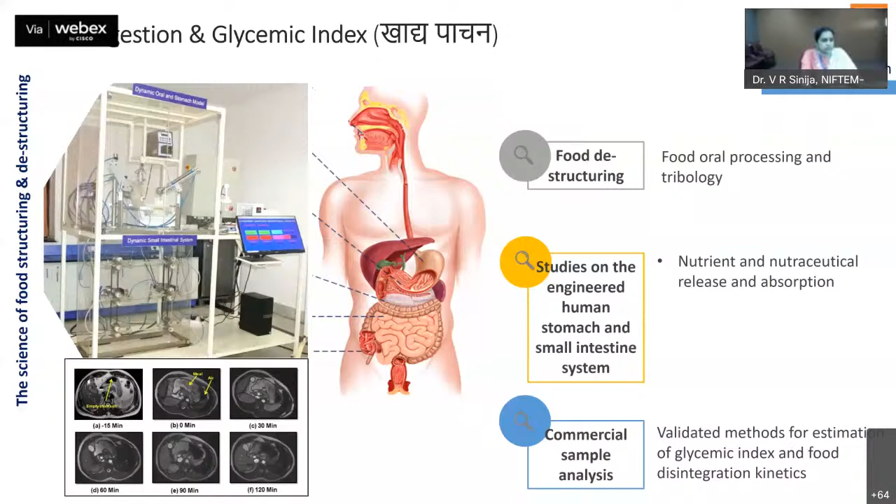Another concept which our previous speaker was also telling about is waste utilization, or converting waste to wealth. Most food industries are also working in this angle now, the zero waste technique or waste to wealth concept. We also worked with this aspect, and we have developed one product along with PepsiCo.

You can see these Crispz chips. This is actually made from waste products only - these are the waste items we have utilized here. Mainly the base material utilized here is potato starch, which we extracted from the peel as well as the fines of the potato, which we got from the potato chip making industry.

We have also fortified the items with fruit industry waste, like pomace from grapes as well as pomegranate, and oat and apple pomace waste, and then pulse industry waste also, which is a very good source of protein. We combined all this together so that instead of wasting these materials, we can utilize them and convert them into a good product, a very healthy product at a very reasonable price.

Another thing is jackfruit, which you are all familiar with. We know that only 30% of this jackfruit is in consumable form, and the remaining 70% is going to waste. So we can convert this waste too, because it contains a lot of fiber, converting that into fiber as well as some other bioactive materials.

We converted that into biodegradable plates, even edible plates and edible cones for ice cream. So this is actually coming under the sustainable development goals of the UN also, like resource recovery and zero waste concept.

Another emerging trend which food processing industries are now looking at is non-thermal techniques for sterilization or pasteurization. Usually they will be using thermal techniques. The disadvantage of thermal processing techniques like retort processing, sterilization or any heat treatment is that most bioactives, vitamins or nutrients are heat labile, so they will get damaged due to this heating process.

To avoid this, people are now going towards non-thermal techniques like high pressure processing, cold plasma, pulsed electric field, ultrasonication, ozone - I already mentioned this for storage application and sterilization purposes - and supercritical fluid extraction. Many non-thermal techniques are now emerging so that there won't be any heat application, so you can preserve the nutrients as such, and also maintain the fresh-like taste.

Coconut water and tender coconut water is a most lovely product, but once you expose it to the environment, it will deteriorate immediately. If we go for any thermal treatment, that natural taste of coconut water gets lost. So how can we preserve that? HPP is a very good candidate by which we can preserve that fresh-like quality.

All these non-thermal techniques have a lot of potential, and in foreign countries they are utilizing them. In India, only a few companies have started using this technique. So this is one emerging technique.

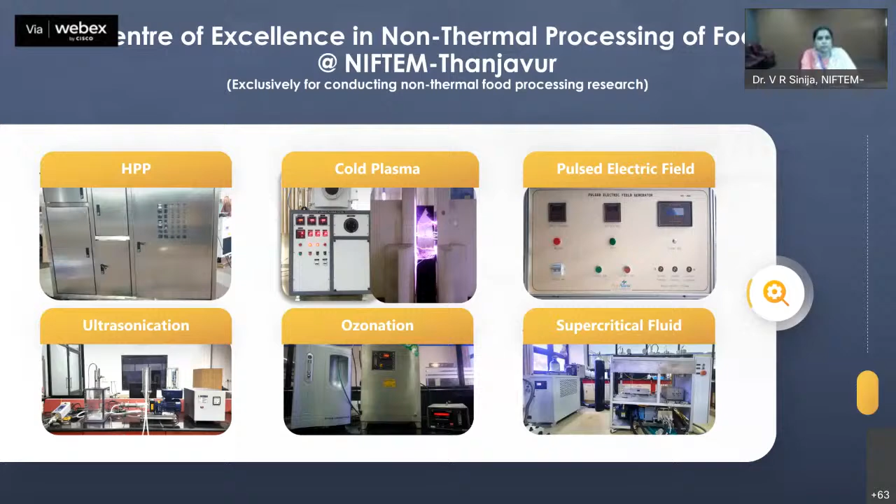Another area is virtual marketing and sensory analysis. Through virtual reality, consumers can experience actual marketing, and through eye tracking mechanisms, we can analyze which type of product and color attracts consumers, and what level of perception they have. All this can be analyzed using data mining techniques and software, helping us design better packaging or better product placement in supermarkets. All this is made easier by virtual marketing.

Coming to the sensory aspect, we can now mimic taste and flavor through the tongue and nose using e-nose and e-tongue techniques. These products can be tested easily and authentically within no time. Software is now available that can even capture the facial expressions of a sensory panel, so based on their expressions we can judge whether they liked the product or what their perception is. These are the emerging trends in sensory aspects.

Coming to drying techniques, drying is the age-old preservation methodology people have followed - drying and dehydration. Now there are many modern techniques like spray freeze drying combinations, because freeze drying is the most suitable method to preserve quality, but freeze drying is very costly.

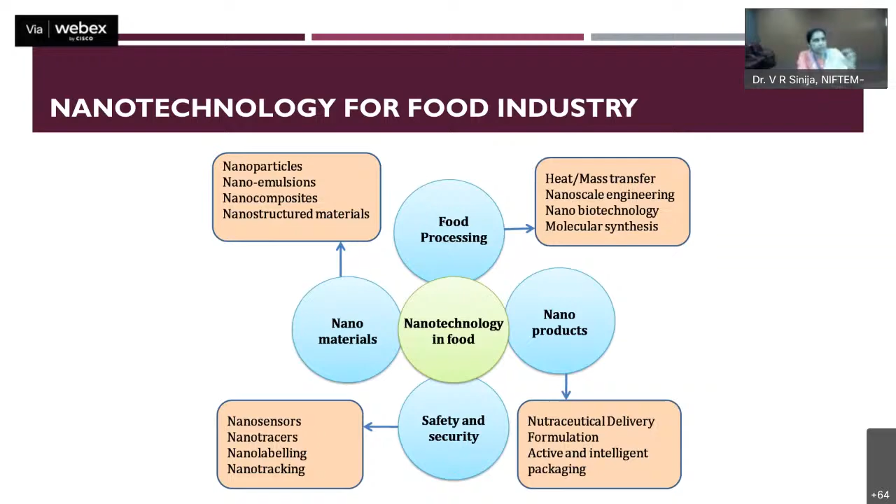Coming to the packaging side, since plastics are now banned by our government, we have to find alternatives for single-use plastics. There are a lot of potential applications for packaging material from bio waste - onion is a good potential candidate, like bagasse from the sugarcane industry. Then rice straw, wheat, paddy straw - lots of biomaterials getting wasted during processing of raw materials that we can convert into bioplastics, or even use for edible coating of fruits or vegetables.

We can make trays for packing biscuits, and also have secondary or tertiary packaging material, some wrapping within biscuit or cake packs, and an outer layer for one more packing. Like that, lots of packaging applications are there.

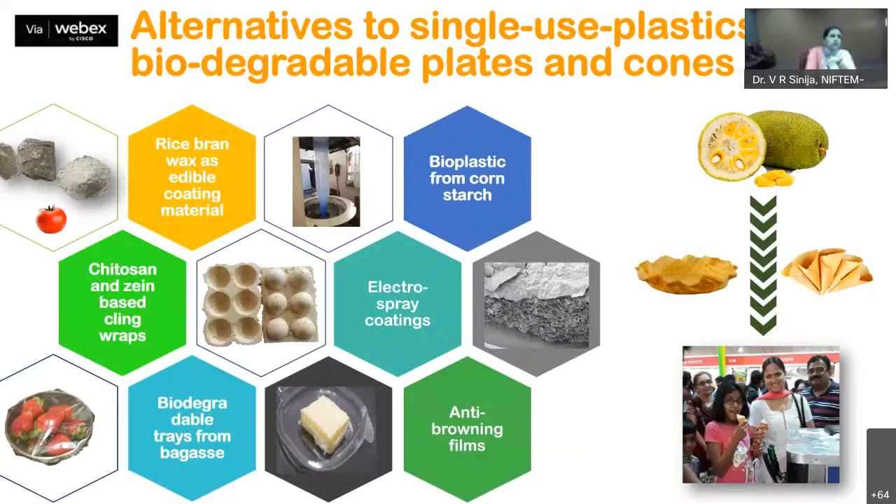That type of intelligent and active packaging is also there. Another thing is bio material we can use for biodegradable packing, like edible plates and edible cups, as I mentioned earlier from jackfruit. So many techniques are now emerging to convert bio waste into a usable or value-added form.

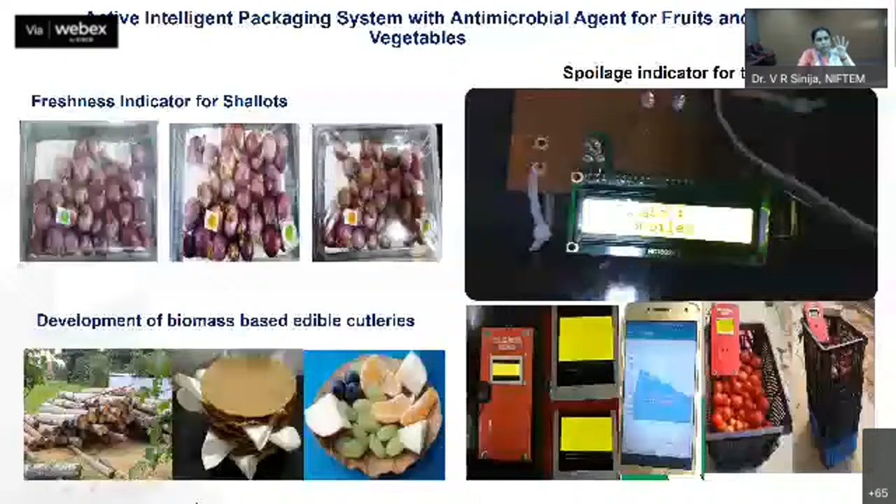This way there won't be any waste, a zero waste concept, and it enhances the income of the producers also. We have developed packaging films and carton boxes from onion waste, which gives additional income to the farmers also.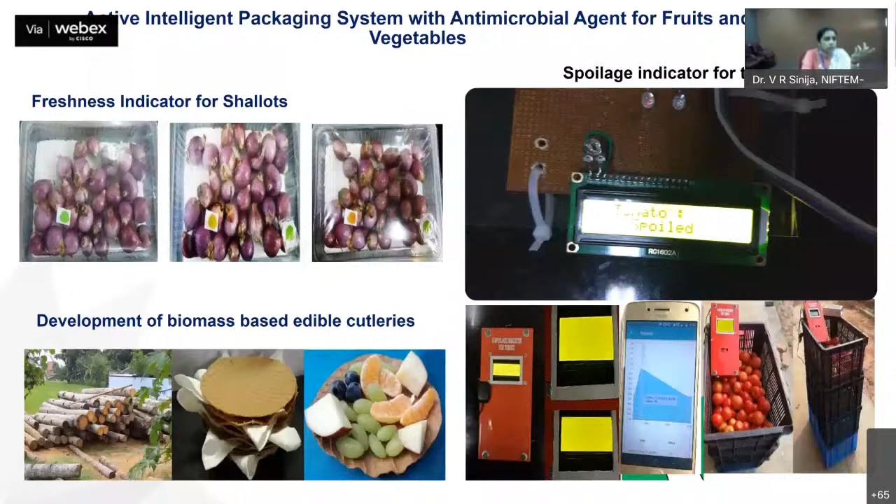So we can invest smartly towards a healthy world and towards a hunger-free world. Our vision is that through food processing, we can make our country the food factory of the world, because we have lots of resources, but we need to process it properly. We have to tap the potential.

In Kerala also, lots of resources are available. My humble request to Professor Sudhir and the team is to encourage more processing industries in our Kerala state, because we need to tap a lot of potential from Kerala.

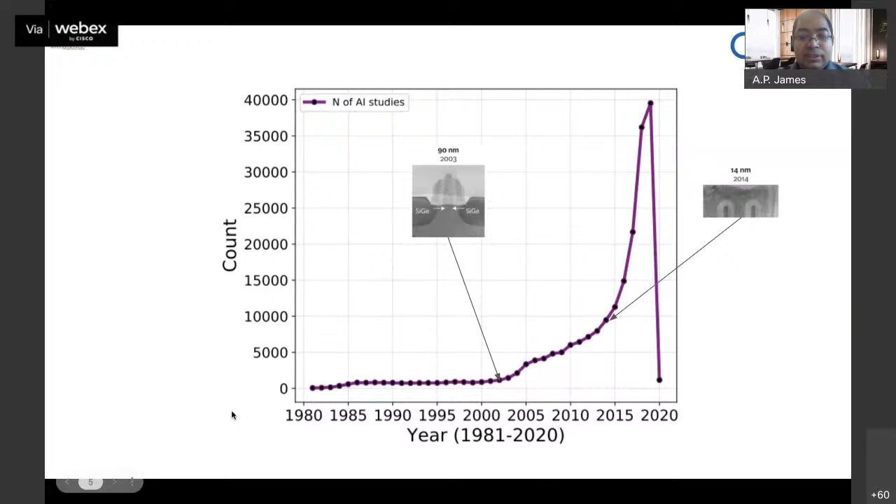So what has been the problem? Scaling - if scaling was great, what was the issue? Because if you can just reduce the transistor size, that would be perfect, and we were able to reduce the transistor size. But when it comes to microprocessors, you would see the frequency got limited. You cannot push it beyond a particular frequency. Power has been a huge problem.

And in fact, if you look at almost all the architectures today that are trying to push the boundaries of computing, you would see that the CMOS technologies have more or less come to the limits of energy per computation. So if you want to push further down, make the devices low power - when you pack more and more devices, if each device consumes the same amount of power, you're looking at overall the chip to have much larger power, which you don't want. So that's where new devices, materials, and architecture come into picture to a great extent, if you want to find practical use.

And whenever a new device or material is introduced, this is not an easy process. Taking it from the concept to actually taking it to industry would usually take over 3 or 4 decades or more. Some of the technologies people have tried recently, it still took almost a decade to push it to even a small portion in the industry.

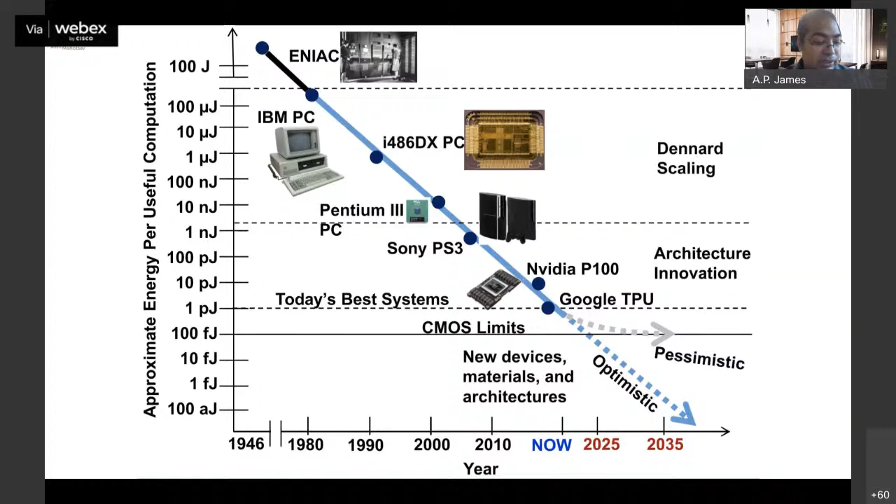So the semiconductor industry as such is very much dominated by CMOS. So anything if you want to replace CMOS, that is seen with a very skeptical eye, because that requires a huge amount of investment. So whatever new devices that you want to introduce, you need to really see the practical side of things, like how you can integrate that into the current process, and that's not an easy job either.

So people have been looking at scaling, and you can see in the y-axis the scaling part that has happened, and this has really pushed the digital processing, information processing part of it. Basically you try to achieve, for the same node technology, much more than what is typically achieved with a digital system-on-chip kind of solution. So for that, diversification is seen as one of the things where you introduce analog, passive, biochips, and so on and so forth.

Also looking at various integration technologies, packaging technologies. 3D integration is one of the main things that is looked at, trying to put more and more things onto the same chip area. Maybe increase the volume, but the area remains more or less the same.

So in that way, more can be done, and people in industry have been trying to push the boundaries. In fact, this is one area where the amount of know-how in each of those foundries or design labs is probably going to be a lot more than what is available in the public domain. And that's why, if you're working in semiconductors or areas of this nature, it's important to talk to the industry quite a bit, because many of the things require huge amounts of funds. Usually research labs will not be able to afford many of those things.

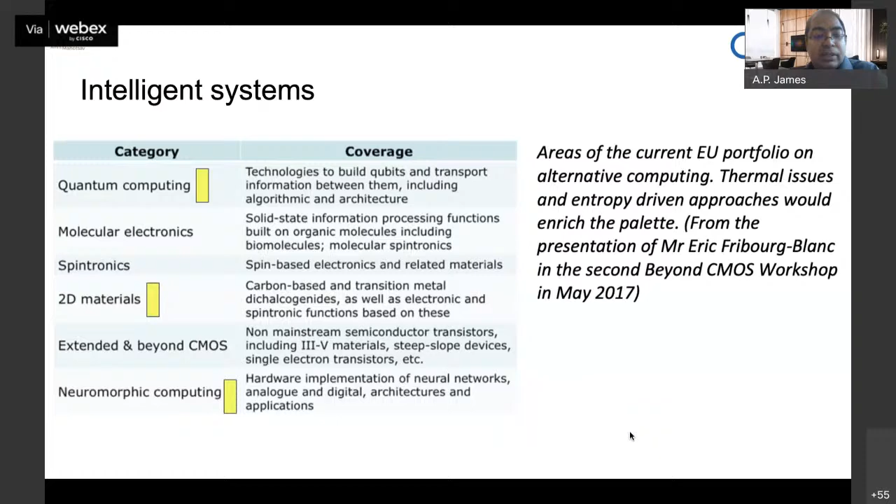When it comes to intelligent materials, the word intelligence has a very specific meaning. It's not like cognition itself, it's also about being aware of the environment and being able to adapt to changes in it. Intelligent 2D materials are materials that can adapt to the environment, that respond to particular stimuli, with applications like self-healing mobile phone screens, shape-shifting airplane wings, or targeted drug delivery.

This application was shown by Novoselov and his team, where they used MoS2 graphene to show how you can work with drug delivery systems.

We have a couple of centers that are working on translation research. What we try to do is take some of those ideas and translate them into a real product, working with companies for doing that. More details, if someone wants, I'm happy to share. Essentially, the idea is people come with proven research, and we try to see if it's possible to convert that into a real product, working with various companies.

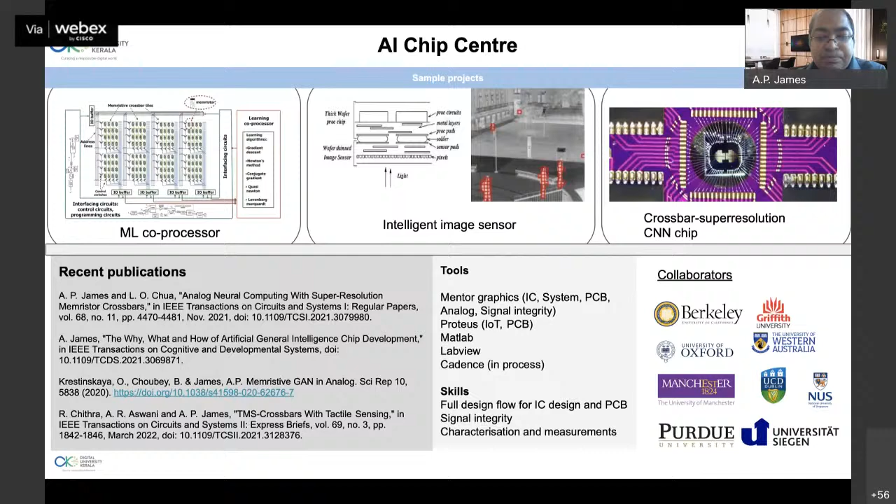Some of the other practical applications that we have deployed, for example, high voltage insulator monitoring. We had done some work on that, adding intelligence to the drone, making it able to detect high voltage insulators, detecting defects and all those things. Inside the drone were these kind of processors which could do the high speed detections, classifications, and all those things.

Then we are currently working on various kinds of drone networks, where you're looking at various security related things related to drone networks, and we're building our own hardware for it from scratch. We're using some existing architectures, but with our own chips.

Then wireless charging is another aspect, where we need a lot of optimization to be done, and for those optimizations, again, we are using our own accelerators and other things, and we are trying to see how to make it more effective and cost effective. A few of them are working on that.

Autonomous driving is another area that we are looking at. We're collaborating with some of the industries on this, and there is also consumer electronics. We have a few companies that we are working with, improving some of their existing products, and we'll possibly have a few versions of refrigerators and washing machines coming out with what we have contributed.

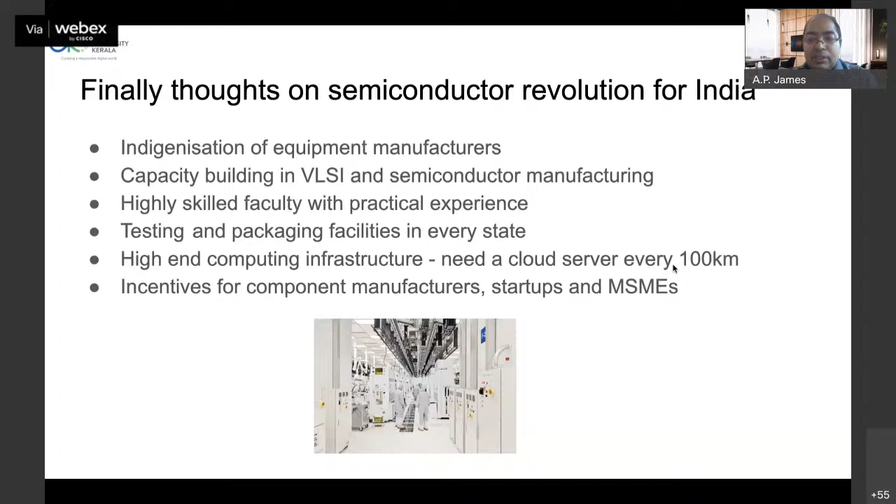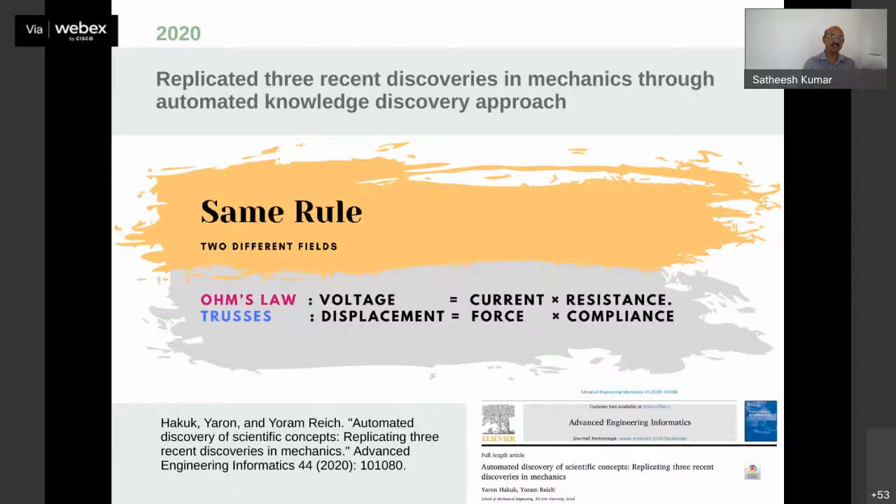Actually, they were trying to find out the whole knowledge gaps and trying to fit with equations. Even when the periodic table was first invented, there were gaps. They did not know what molecule would go into that particular cell, but still they could anticipate that there would be a chemical molecule to fit in a particular cell. So this is something like that.

Now a knowledge graph has some more attributes. Suppose there is a sentence like 'Rama is writing a letter.' How can you convert that into a graph? Rama is a subject, a noun, so that can be put as a node, and there is a predicate, then the letter, that can be another node. This is connected by the verb, so we usually use the root form of the verb for putting it. It involves natural language processing, so with all the tools of natural language processing, you can convert sentences into a mathematical object called a graph, with attributes in the edges.

So what if we can convert the whole literature in one particular domain into a knowledge graph? It is like a database, from which you can query questions, get new information, that kind of stuff. There are already a lot of results published in this, especially in material science.

For example, if you want a material of a particular property, how do you do that? Usually experimental scientists go to the laboratory and experiment with that molecule to see if they get it. But how many candidate molecules or chemicals are there? Millions of materials or chemicals exist, especially organic molecules. Which one is the most suitable one? It may be very costly and time consuming to experiment with all these molecules. At least you can get an idea or select a few candidate materials for doing experiments, and this kind of information you can get from a knowledge graph.

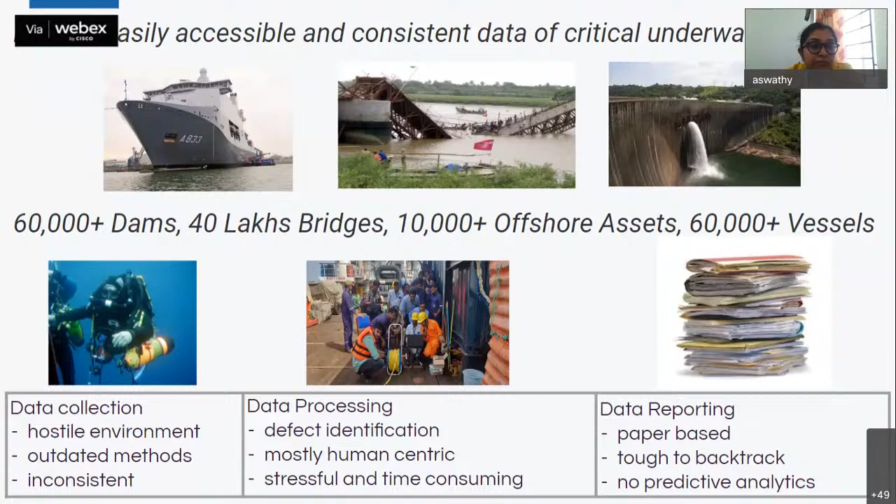We also have a software platform where we provide software reports, which is easier to track and analyze later. At EyeROV, we have developed underwater remotely operated vehicles ranging from Tuna to Turt. Tuna is India's first commercial underwater drone, with an operational depth of around 100 meters, and it can withstand 2 knots of water current. Turt is an advanced version which goes up to 200 meters, and can withstand 4 knots of water current. They can be integrated with different payloads as per operational requirements, like side scan sonars, imaging sonars, NDT equipment, etc.

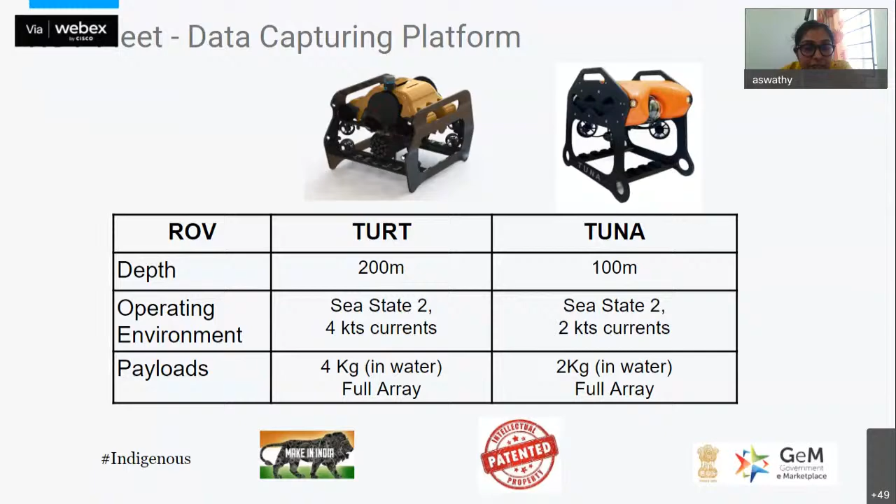Our product gives live HD videos, and it can work in extreme hostile water conditions, as they are equipped with low light HD cameras and 6,000 to 9,000 lumen lighting. We have an internal battery which gives 1 to 2 hours of endurance, and it can also be externally powered, giving 5 to 6 hours of operation. It is extremely portable and safe because there's no human risk involved, and it is very user friendly. We have so far completed 40 plus projects, and we have an industrial grade patent.

We also have a software processing and reporting platform, which is an integrated solution for asset inspection. While we take videos and photos underwater, these images can lose clarity due to water turbidity, haziness, etc. So we use machine learning technologies to enhance these images and provide better solutions. Also, while we take photos, a person has to sit through and analyze data to understand where the defects are. So we make a software report, which is data analytics enabled and easy to interpret and locate defects and anomalies. It is highly appreciated by clients because beyond eliminating time and manual process, it can also be referred to multiple times for rehabilitation and reconstruction works.

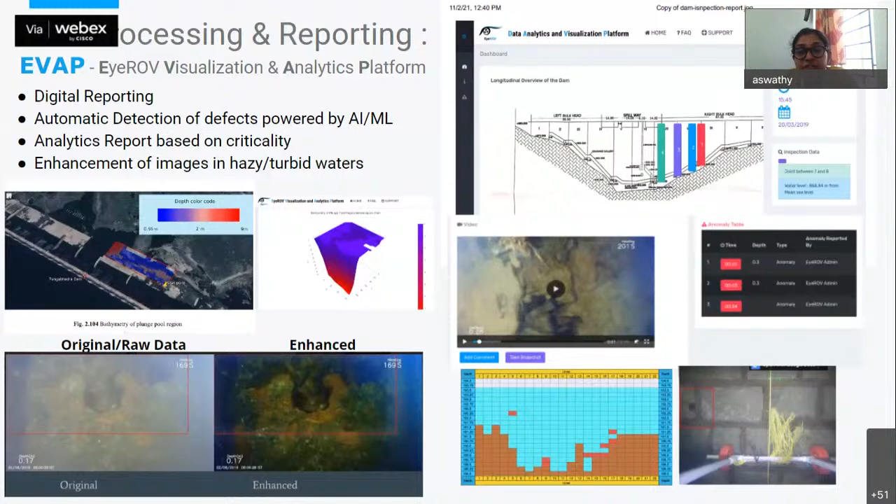Our vision is to make underwater surveillance smart and efficient, and we are continuously working for it. Along with the IDEX project, we are working on an autonomous underwater vehicle, mainly for defense applications and search and rescue operations. We are also working on an autonomous surface vehicle, an alternative for traditional diesel boats, and it is environment-friendly equipment.

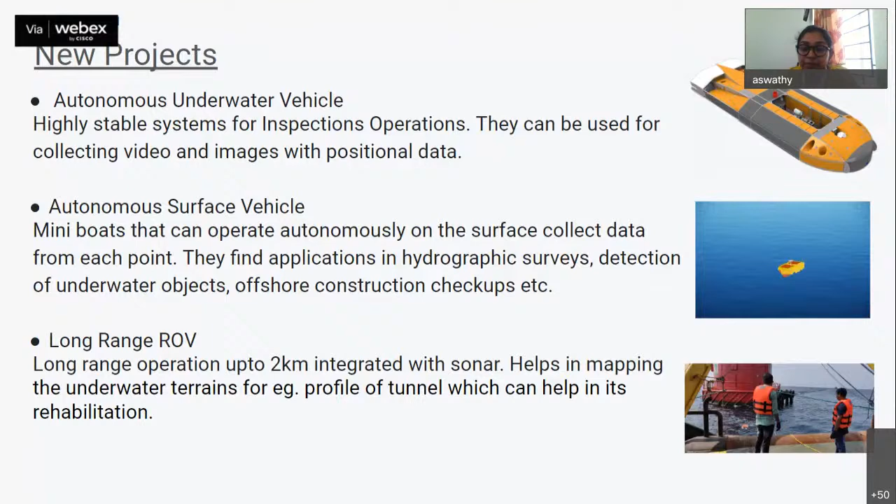It finds application in hydrographic surveys, water quality detection, pond and lake cleaning, detection of underwater objects, etc. We're also working on different specifications of ROV. One such specification is a long-range ROV, for a long-range tunnel, duct or pipeline, etc. The operational range is around 2 kilometers for this new feature. Integrating a side scan or profiling sonar will help in the entire mapping of a tunnel or duct.

We have been awarded by different organizations like Indian Technology Board and National Startup Award. We are supported by Maker Village and KSUM, Kerala Startup Mission. This is our team. Our CTO was earlier working with National Institute of Ocean Technology, where he was a project scientist on onboard ships. Our CEO was working with Samsung and Gray Robotics. Both of them are IIT alumni.

Thank you. We would like to thank Kerala State Council for Science, Technology and Environment for giving us this opportunity. Any questions?